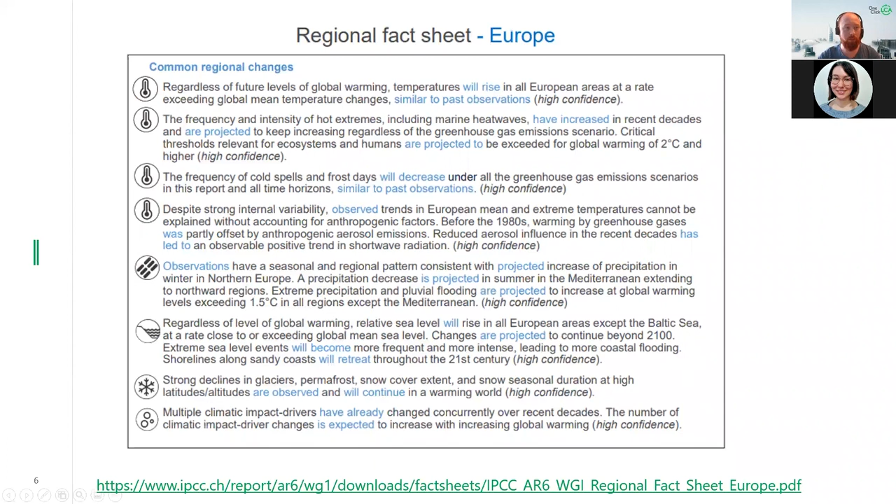So as I said earlier, 39% of global emissions are coming from the construction industry relating to buildings, 28% from operational emissions, and 11% from materials and construction. So those are the kind of target groups we are trying to reduce.

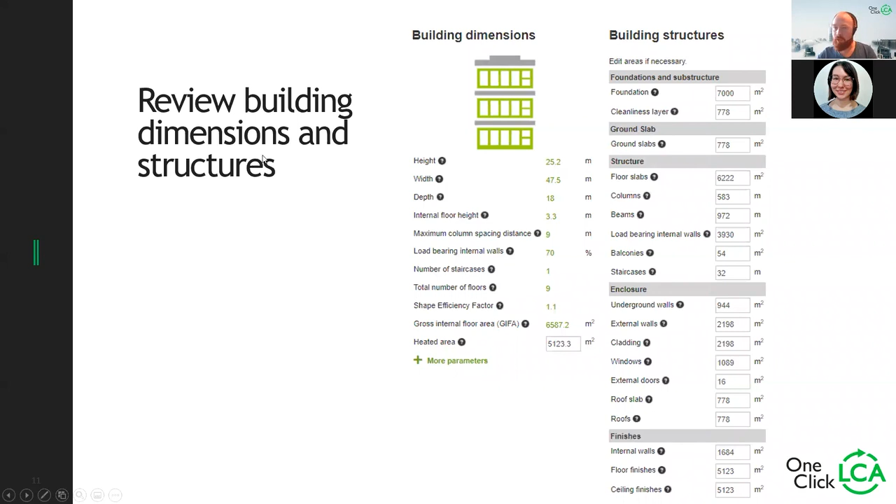If you make changes to the parameters in green, it will automatically update the building structures, but it doesn't go the other way around. So if we, for example, have the height of 25 meters, and I change the foundation to 8,000 square meters, it won't automatically update the building dimensions. So just make sure it goes one way. I'll show this in a demo - I'm just covering the theoretical part first, then I'll show how this works. If we go to the next one, and I'm sorry about my mouse, I'm just trying to navigate between the screens.

We can then also make some changes. After we have decided on our building dimensions, we get to the overview page where we already get that overview - our baseline CO2 equivalent per square meter. I can also click on the assumptions if I want to go back to what I've just done before, to see what I filled in for how big my building is or what kind of frame I have. The emissions you see right now are for the chosen design I had selected.

This was a precast concrete frame. If I wanted to, I could change it right away by going to apply scenario and taking a new option. The apply scenario feature is not available in all versions of Carbon Designer, but in most of them, for example the international one, you have it as an option.

We can then go through all of the different elements here. We can click on these elements, expand them, and see what is underneath them. If we take the example of a concrete column, I can see there is some data underneath it, but I could also click it and choose something else - change it to a steel column or perhaps wood or any other option. For most of these options, you can also change the constituents underneath them, which I'll show in a bit, by clicking the edit button.

If you click the edit button in the concrete, I could change the grade of concrete, change it to have a different percentage of recycled content, or change the reinforcement steel - these kinds of things, all the elements related to the constituents. If we then save this, it moves directly to our building materials query, so we right away have the data there with the different constructions - for example, the steel core piling, which is automatically calculated with constituents behind it, the concrete sandwich elements, etc.

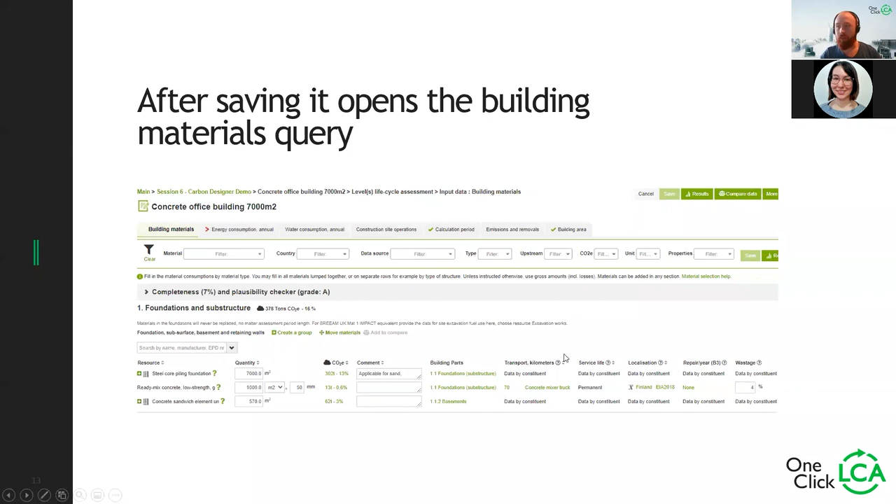If we fill in the mandatory queries, we actually also get our results. So this is what I'll show in a bit as well. So then if you have filled in your Carbon Designer, you can right away get the score in kilograms CO2 equivalent, the total number, and then also right away the circularity score just based on the materials we have included right there.

So now I'll talk you basically through how we optimize this and make sure we can make some changes here. And we'll do this in this case from an emission point of view and a circularity point of view. So I'll now switch my PowerPoint away and we'll go through these steps in the software. So I'll open my project, Session 6 Carbon Designer demo. And as you can see, we already have done some stuff here.

So let's run first once through the step of actually creating this Carbon Designer design. And then we'll do again this optimization. So for this, I'll just create a new design. So we'll just do example Carbon Designer setup. I'll just leave everything the same regarding the settings. I've set up this project to be in Finland, but you can of course set it up for wherever you are. We just click on the input data and we just go directly to the create baseline, what we just saw before.

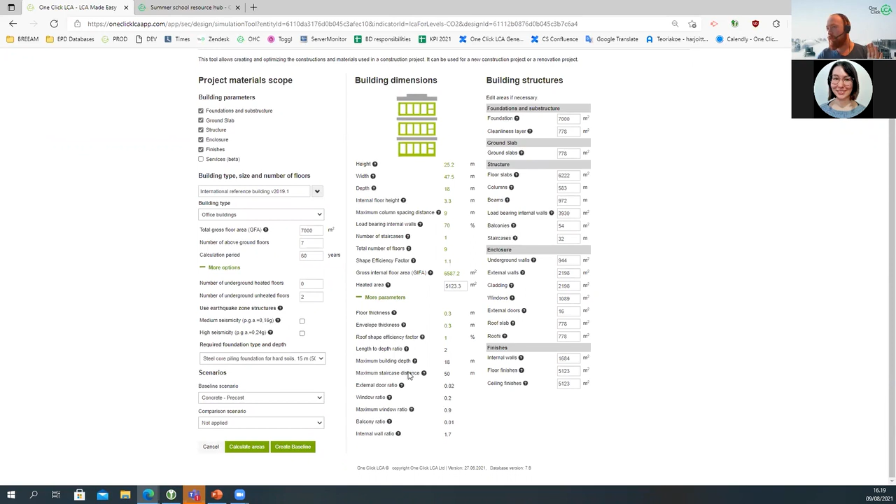We then have our building dimensions. So we have the different elements of how long everything is. You can also open the more parameters to see a bit more what is underneath them. And then based on the dimensions we have here, it automatically creates our building structures. The building structures are important because they define actually the quantities of our materials. Because if we use Carbon Designer, it makes use of our constructions. So basically these ready-made assemblies, which already have materials underneath them. So there's an assembly for the foundation, for the cleanliness layer, for the ground slabs, etc. So all that is already available there.

If this all looks okay, I'll just click on Create Baseline. And in this case, it will probably take about 10 to 15 seconds. But now it will try to make my theoretical building that I've inputted based on those settings. So now it's creating an office building in Finland, 7,000 square meters, 7 above ground floors of 1,000 square meters each, 60-year life period, 2 underground floors, and I think I'd set a 15-meter foundation depth. So I'll just have to wait until it bundles this together.

Sure, Maria. I'll try to talk a bit slower.

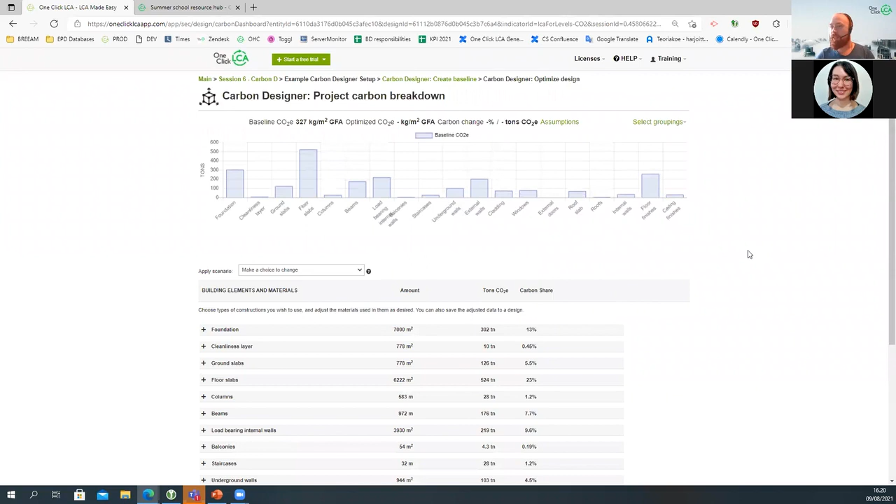So now we can see what it has created from Carbon Designer. So I'll zoom in a little bit. We can see we have gotten our emissions for our baseline CO2 equivalent. Yeah, I'll zoom in a bit more. Is this better?

We have the assumptions here. So in the assumptions, I can right away see what I have chosen already, basically what I've just discussed. So that 60-year life period, 7,000 square meters, 7 above ground floors. If I then have the initial choices, I could make a new choice. So I could, for example, load the entire building to have a wooden structure, or I could do in situ structure or steel, and it would automatically update everything.

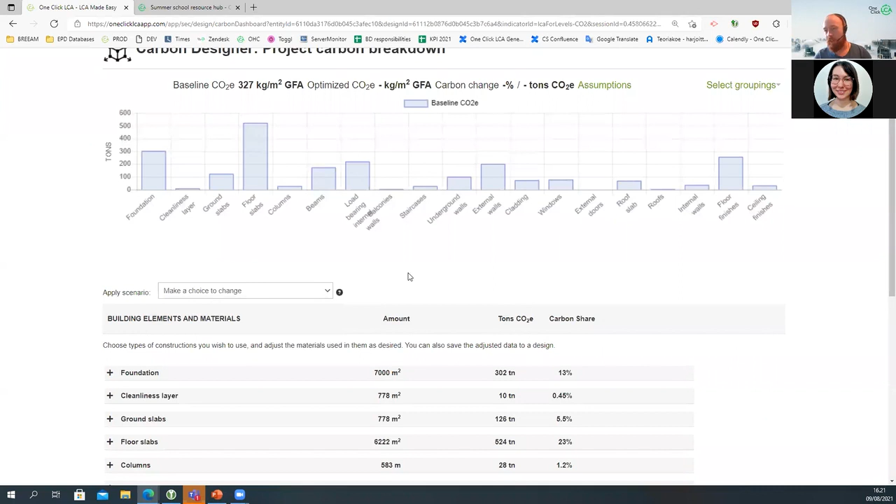But you can also do that manually. And the manual part is the part I kind of want to discuss right now. So if I have these elements, maybe we look at the ground slabs. I can see that the ground slab is a concrete ground slab assembly with some insulation.

And if I open it, I can also see the elements underneath them. So we can see that there is, for example, EPS. I could also choose different types of EPS or have different types of concrete I could choose, different types of reinforcement, etc. If I make some changes here, it will automatically update it.

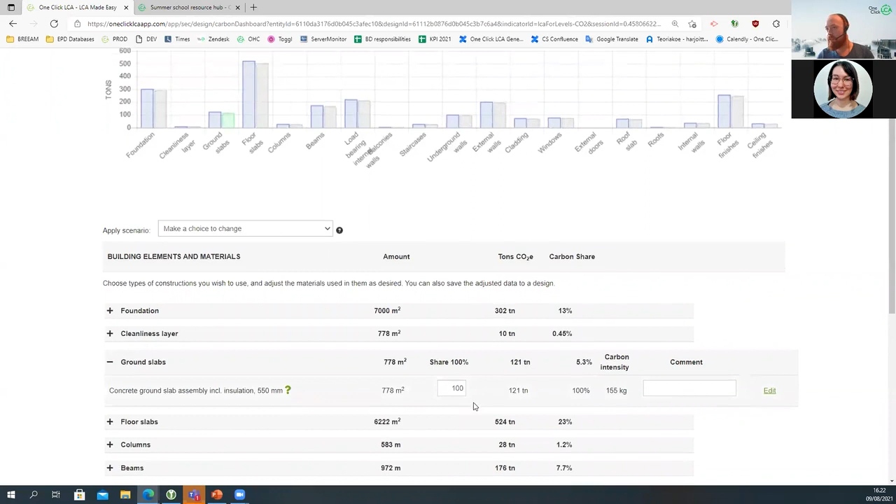So if we have here 126 tons of emissions for this specific assembly, I could say we're changing this to reinforcement steel 100% recycled, and it changed that by about 5 tons. So we can right away see also it updates, optimized 121 tons.

We can also change entire assemblies. Of course, from an optimization point of view, it's really nice. But if you're having a building and you're only changing the columns to something, it might not be structurally sound. So you have to make these kinds of changes so that they would, of course, be representative. But let's say we have our concrete columns. We can see from the concrete columns that these are made with a ready-mix concrete and with a reinforcement steel. I could also click on these to find out information about them.

But what if I change these concrete columns to steel? Like we're not doing any concrete columns now, we're replacing it completely. We change here to steel column. It will update it, making sure it has changed them. And then right away, we can see that if we're actually making this change, it's not really for the better. We're actually ending up with 4% higher emissions. But if we're changing this to a timber column, my bad, we can see that we actually reduce the amount of emissions there.

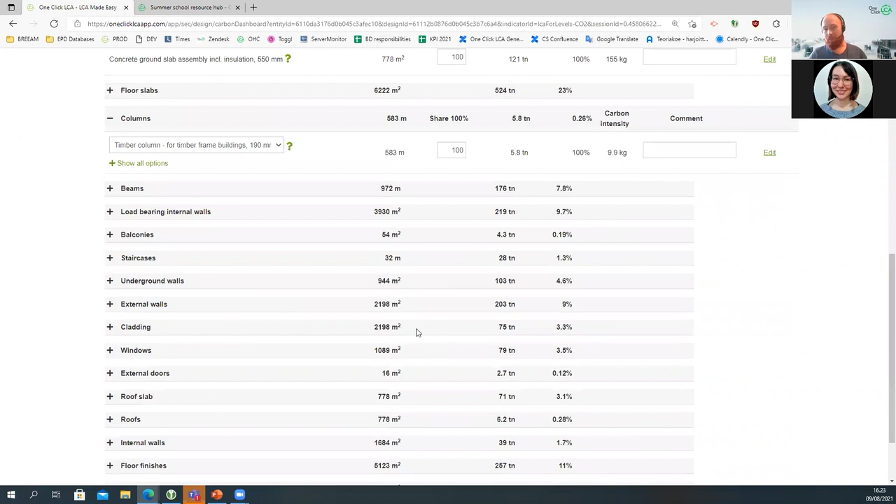So this kind of quick optimization you can really easily do in Carbon Designer. You can also do it later when you're on a building materials query, but if you want to maybe already try some different things, we can do it here as well. So for most of these elements in the building, we can do this kind of optimization.

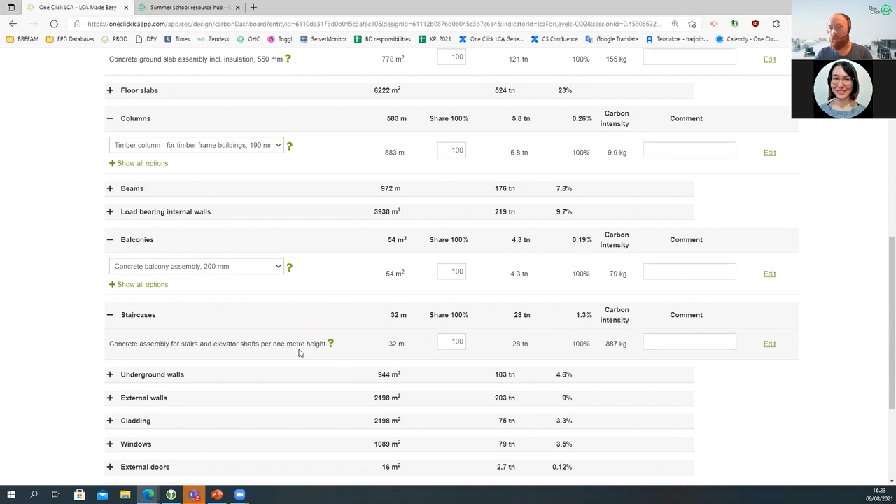Not all have these options, like balconies, we have just a couple options, but for example, staircases, there's just one option. Because usually if we're having an office building, staircases are still using a concrete elevator shaft, which while you could replace it with CLT, it's not a very common option nowadays still. So you can go through all the options to make sure that what we have chosen is relevant for the type of assembly we are doing.

Maybe I could, for example, change my roof to a green roof assembly. And I just wait until it uploads. And then I can right away see that for the roof slabs, for example, I've done some optimization now as well. So these kinds of optimizations you can always run through and find out what would work best for you.

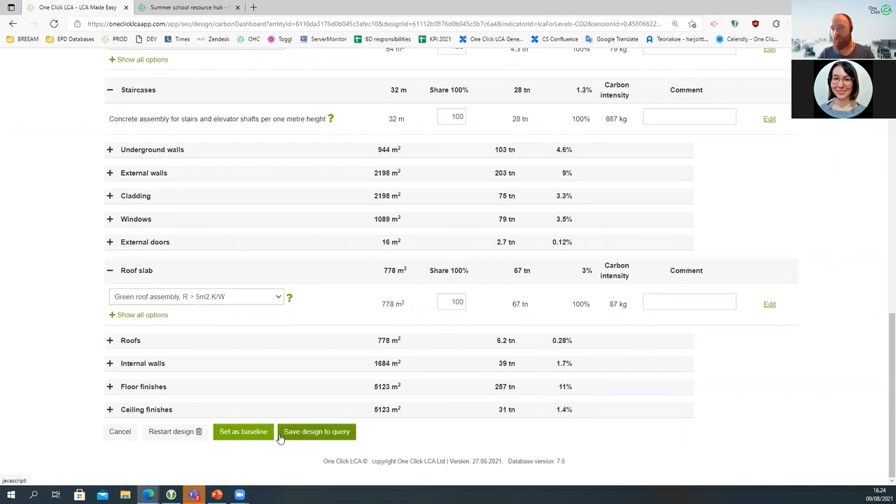If this works okay, we could say, okay, we are making this our new baseline. So these options are now going to be our base, and we're going to try to improve on that again. Or we could also save it directly to our building materials query and just see what kind of results we get right there. So if you click on save design, it moves it right away there. And in this case, it will actually move it first to the building materials query, not to the results page.

There's one question, is it possible to see the layers within a certain component assembly? Yes, and I will show it in a second once it's done loading this. Usually it takes, again, about 10 to 15 seconds, and then it will be ready for usage. So we can see, if you normally do an upload, it takes you straight to the results page. Here it will take us first to the building materials query.

And to answer Zahabia's question, can we see the layers? So the different types of constructions we have used are usually defined based on square meters. So we can easily calculate with Carbon Designer when we have very basic building parameters available. If we, for example, take the steel core piling, this specific one has been recorded per square meter. It also says so in, for example, the resource names or the description. And it then automatically has the data per square meter.

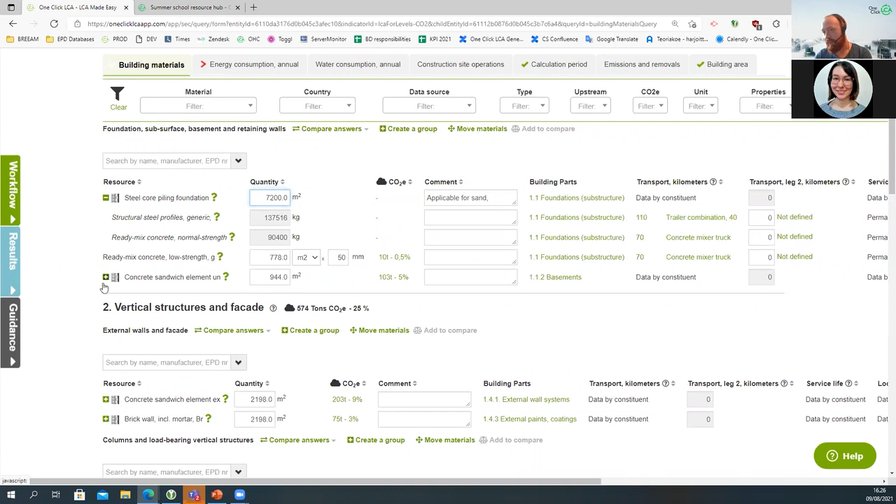So if we would want to quickly change this to, let's say, 1200 square meters, it automatically updates the constituents as well. And these types of constructions are basically how we do all the Carbon Designers. So it doesn't really matter what version you use. They usually have very custom constructions which are relevant for those specific areas.

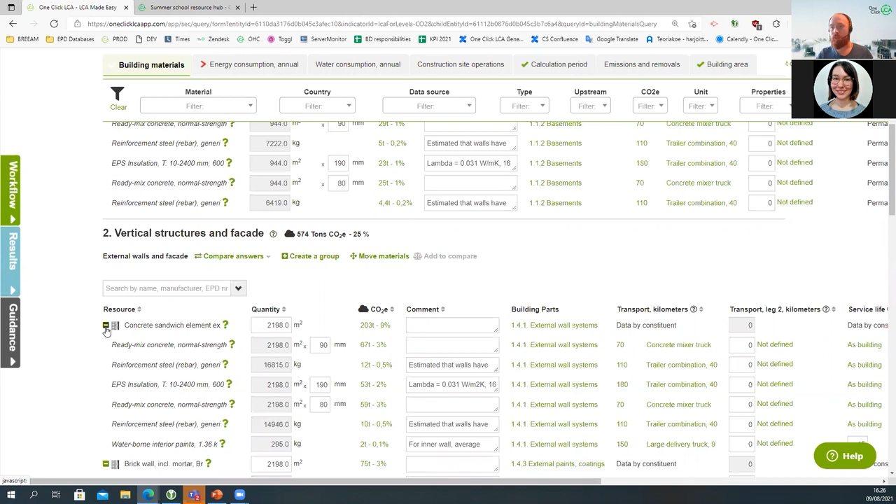If we're, for example, loading this Carbon Designer in Southern Europe or in the UK, the different types of constructions there will be different, and the different constituents will be different. The quantities of materials will be different. So they're all adjusted to what we are commonly using in those areas.

These kinds of constructions, as I said earlier in perhaps session 2 or 3, you can also find yourself by going to the material filter and actually searching for the constructions there. So there's a lot of these ready-made constructions. If you're not really sure about what kind of materials would be included, you can find them there and go through them quite easily.

So how would we do this kind of optimization? Well, we can already do it in Carbon Designer. Basically, before we actually end up on this phase, we decide, okay, we want to change the ground slabs or we want to change the external walls. We could already make the change there. But if that point maybe wasn't the best point and we want to change it later, we can still do it here.

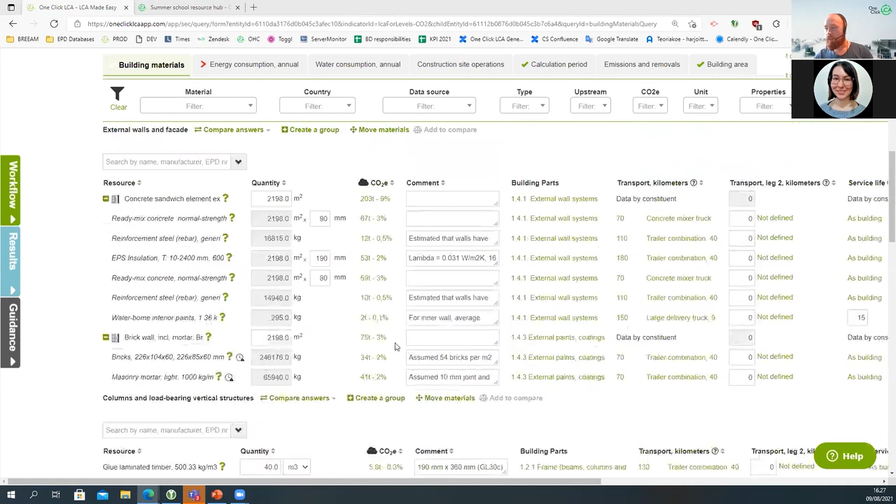So I will go back to the main page. I'll just quickly enter an energy consumption, so we actually also have the figure for this design. And then we can talk about how we can actually optimize the design from an emission point of view to reduce emissions, but also from a circularity point of view.

So I won't actually enter a quantity of energy. I'll just give a base value or a 0, so it actually loads the number. And once this is loaded, I'll take us back to the main page for a sec. Okay, it has loaded that.

So if I now go back to the main page, my example setup has been kind of mixed with what I have there. But as you can see, I'd already made 2 before as well. So the first design which I had made was the office building, where I did the precast concrete frame. I have already done one iteration, which is a wooden frame. So completely timber, as we can see, much lower in emissions. And now I just made some changes in this example design.

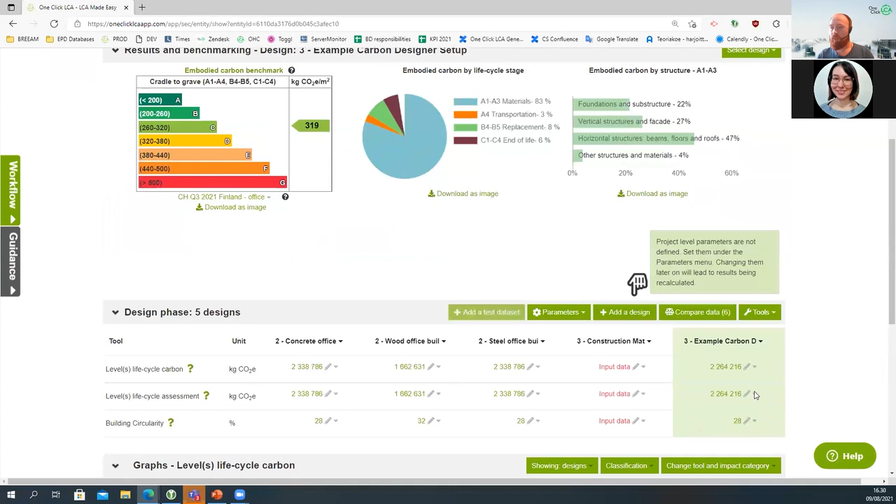So we have now the steel office, which is the same. If I then go into here and I go to optimize design, I'm only optimizing this specific option. So now it will open my copied concrete design where I can make some changes, apply some different settings, and then I could quite easily already do a comparison as well. Just waiting until it's done.

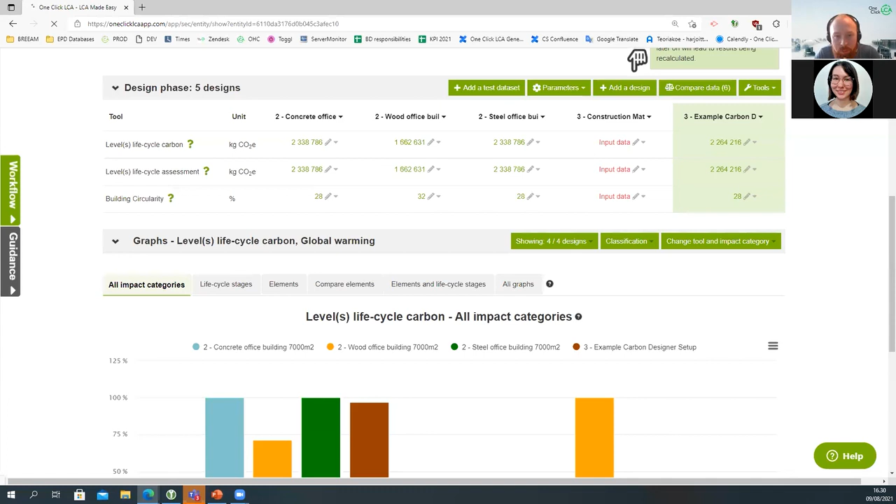Maybe I can answer one question in the meanwhile. Harry Fry asks: if we do a more detailed design after Carbon Designer, is Carbon Designer updated with the new volumes and materials? If you add materials after you have done it, it will not update those automatically. Carbon Designer really works with these presets with existing constructions. If we change those existing constructions, it will change them automatically. But if you add any new data, it will be kind of like an extra or optimized assignment. It doesn't stay within the same design.

So I have now still the same baseline CO2 equivalent as I had in the beginning. No changes because, of course, I haven't made any changes. So if I would now apply a steel frame, it will warn me right away. If I make this change, it will change all the materials I have here. So if I had manually added some new data here, that would be overwritten. So very important to take note of that. I'll just let it override because I don't need to keep this copy design the way it is, because I already have the original one, which was concrete.

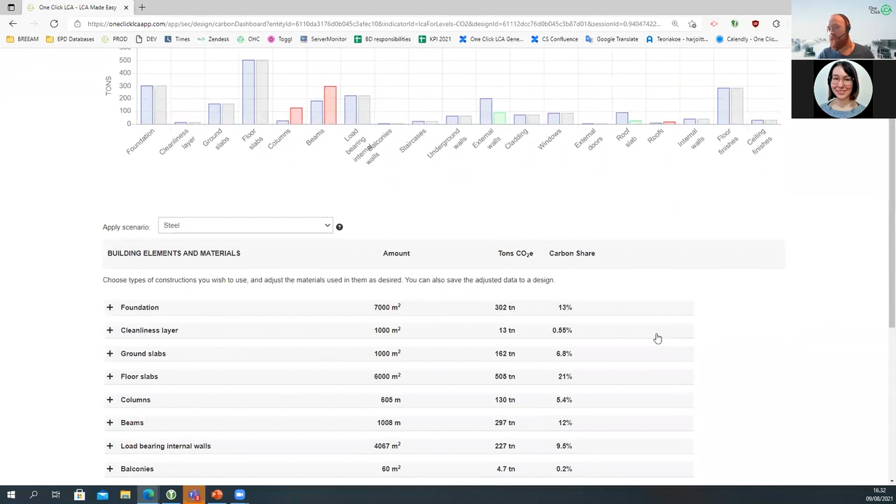I can now see that from the changes I have made, we have changed it from a precast concrete to a steel structure. All the emissions we have will now be relevant for a building which is steel. So we can see we have some hollow core floor slabs. We still have concrete ground slabs, but if we check the columns, these are now steel, and the beams, for example, are also steel. So all the structural elements of this entire building are now steel based.

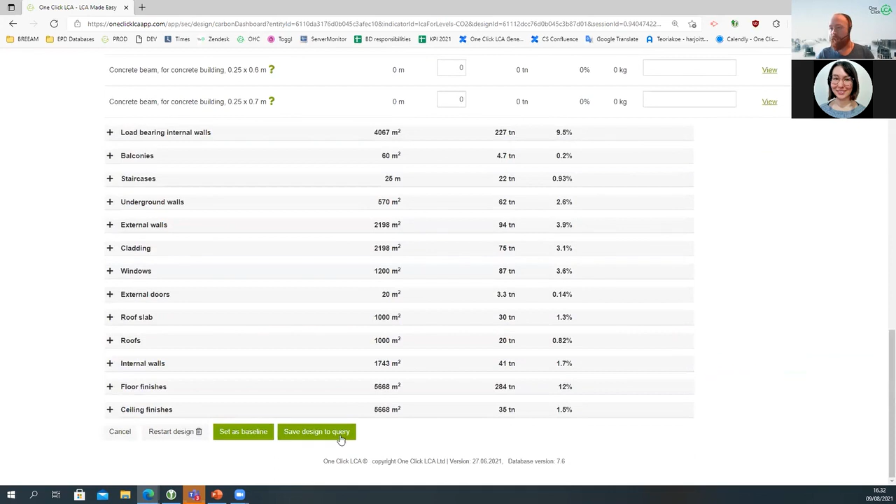On the overall, comparing them with each other, we can see that it doesn't have so much effect on the foundation or the ground slabs, because in this case they would be concrete. But for the columns, the change is quite significant. For the beams, the change is also quite significant. So we need much more steel to have this building be structurally sound. But if we take a look at the external walls, we actually reduce the emissions there. And we can also see that the roof slabs are also lower. So if I would just save this directly to the building material query,

there's a comment from Palab that the constructions shown may not be that practical right now because the real life choices are made on discussion with structural engineers. Of course, that is true. But Carbon Designer is intended as an early phase baseline tool. So when you just know what size building you're going to be building, you might know the floors and whatnot. You could already get an idea of what the emissions would be.

If you're in much later phases of design, maybe already in the concept design or detailed design, you're probably not looking at Carbon Designer anymore. But before that, if you don't have so much data, you might not have a BIM model, you might not have cost plans and whatnot. For that part, it's a great tool.

So I will go back to the main page, and now we can actually see right away also how we can compare these with each other. We have now our concrete office with a certain value, 2.3 million CO2 equivalent, give or take. Our wooden office, kind of lower, 1.6 million, a little bit higher also from circularity point of view. And then we have our steel office. So these designs I've created all have a different type of material setup, but they're all representative for an office building of the same size.

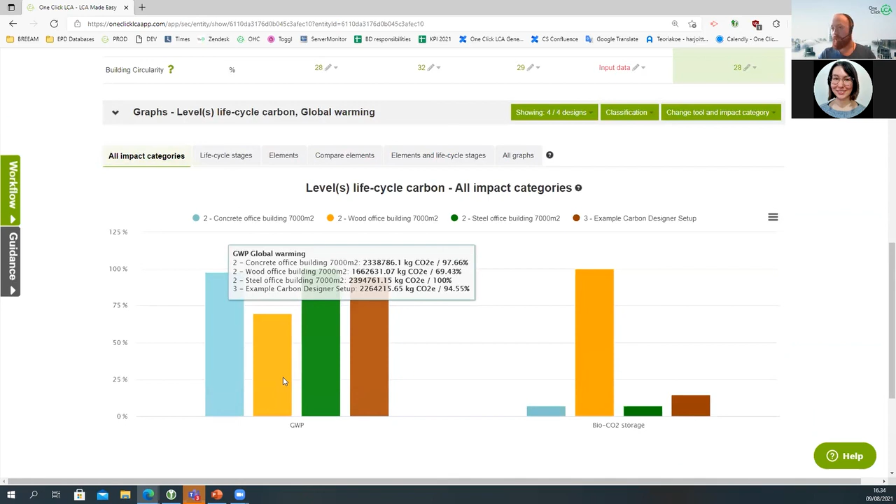If I would also compare the designs underneath here, I could, for example, see right away that global warming potential wise, the wooden building would be much better. If I would check the different life cycle stages, I also just have lower A1 to A3 material emissions. So it's quite good. But if we take a look at the other emissions, for example, the replacements, kind of the same. There's a bit lower replacements if we do a steel building versus the rest. We still have kind of equivalent end of life emissions. And of course, we have some construction emissions, which are kind of the same, and transportation also not that much different.

If you want to change, also looking at different types of indicators, we can do that as well. So right now we're looking at the global warming potential, but if I perhaps want to approach this from a biogenic point of view, so what is much better to use, we can see, of course, that the wooden building has much more organic materials. So technically, we could have much more benefits from there at the end of life as well. But we can also look at any of these other indicators.

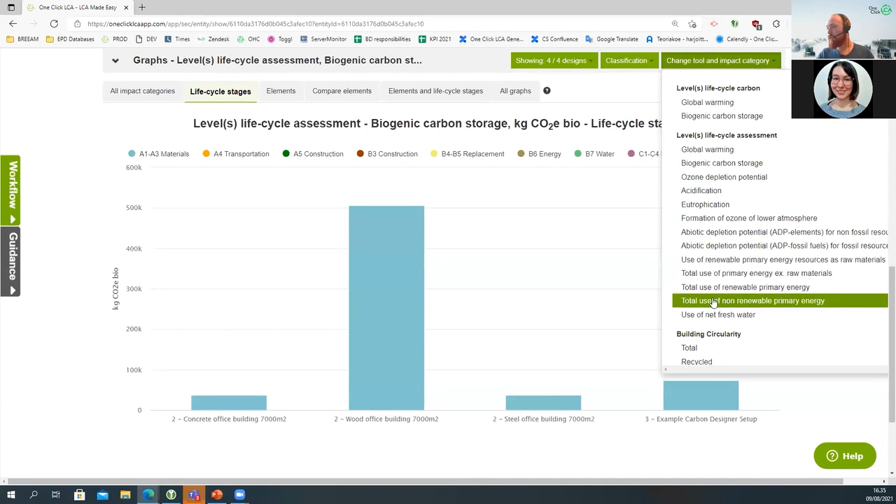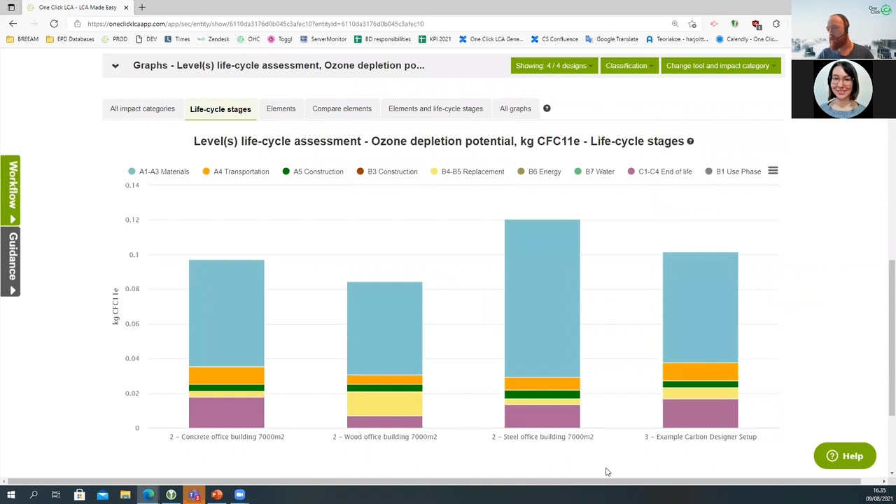So we could do ozone depletion potential. And from an ozone depletion potential, we can see that the steel building is most intensive and the wooden building would be lowest. But if I want to do this from a circularity point of view, I just want to get the total circularity scores, I can do that as well. So we can now see the different materials here, what the circularity score is.

So if we're doing this kind of optimization from an environmental point of view, we can see that if we lower the emissions by quite a lot, in this case, almost 700,000, it doesn't necessarily have to change the circularity point of view right away either. So we can see our concrete building, where we had a 28% circularity score, but 2.3 million emissions.

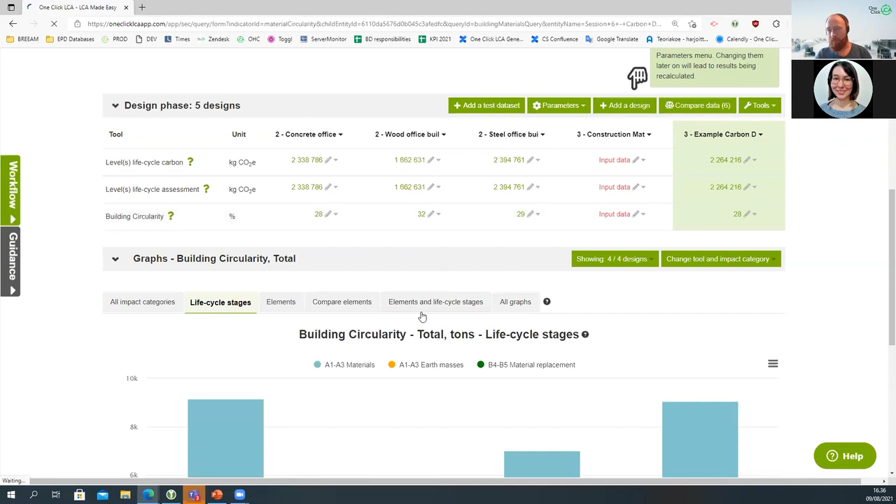If we do an office building, wooden office building, the circularity score isn't necessarily that higher. And that, of course, has a lot to do with what kind of materials we are sourcing for the project. Maybe let's take a look first at the concrete office. So I'll open my settings there. I have all those different constituents, so we can see why the score is the way it is.

If we're opening this one, we can see that, for example, for the steel core piling, we have used, in this case, steel profiles, which consist of 60% recycled content. That, of course, directly translates to our circularity point of view that there's 60% recycled steel there. If we're looking at the concrete, we have used an option with only 10% recycled binders. But recycled binders in concrete are not equivalent to the amount of, for example, cement there weight-wise. So 10% recycled binders in concrete means only 1% recycled volume of our materials.

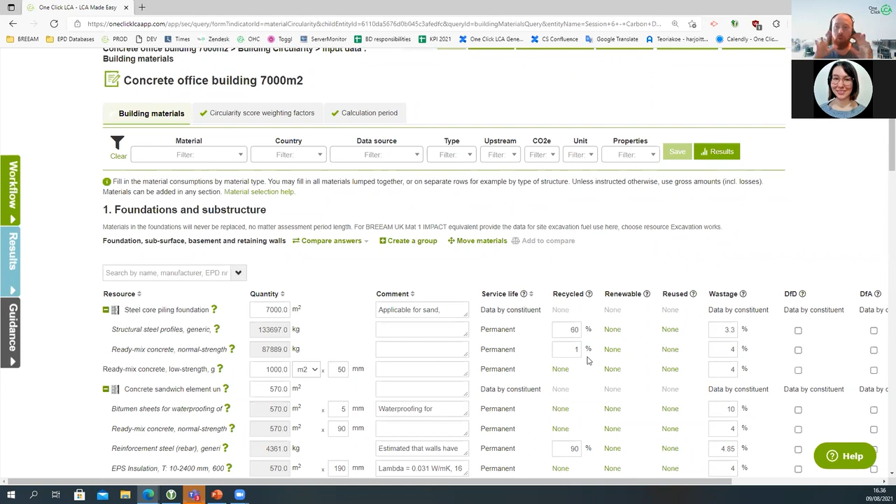And when we talk about circularity, we of course look at all the materials in our building, not just some parts. When we also look at the different elements here, we can see that some of these might not have any recycled or renewable content. So they are virgin materials, which have been newly made, which of course from a circularity point of view isn't great. We can still improve that by having materials which are lower in emissions. But if these are lower in emissions, but they're still virgin materials, it won't improve our circularity score as well. But if we can perhaps recycle them, that could of course have quite an effect.

So we see that we have some materials here which are landfilled, which is not great, but it seems that we might actually be able to recycle the bitumen or these kind of things. So all the changes we have here are directly affecting the circularity score. If we go to the result page for our concrete office building, let's see what kind of things we have. So we have here the 7,000 square meter office building, very high percent of virgin materials. And that is probably because most of our materials here, the concrete, is virgin. We have quite a low percent of renewable or recycled. So the values we have there are just the ones which are coming from EPDs, when a manufacturer tells us, okay, we have used X amount of materials which were renewed.

When we take a look at the returned materials, so what happens with our materials after the building is deconstructed, there's not that much being disposed of. So that's kind of okay. Probably materials which are inert, which we cannot really recycle, like perhaps insulations. We have only some which are recycled, but I haven't marked anything as reused. So that is of course something I could do myself, and I'll show you in a bit in our wooden design. We have a lot of concrete which is downcycled. Of course, if we build a concrete building, the majority of materials are going to be concrete. So concrete we can downcycle to aggregates. So there are some benefits to it. We can reuse it again, but it won't really be the same function anymore.

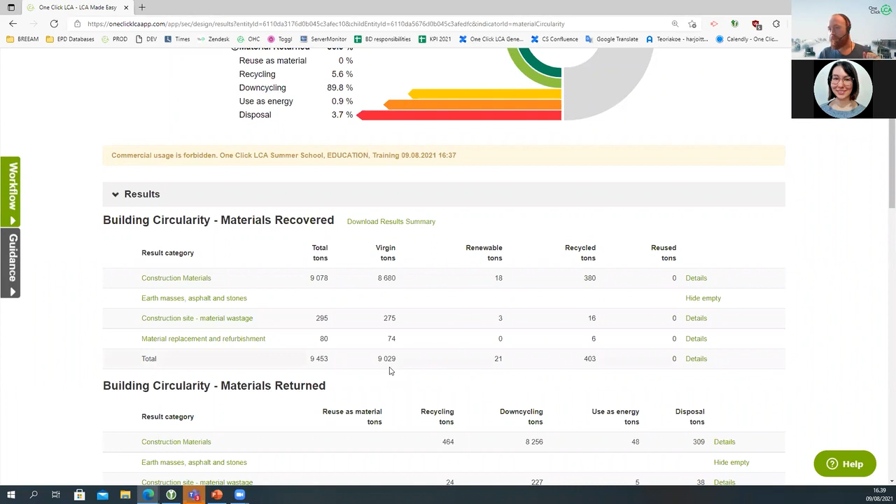If we take a look at the materials returned, what happens with these materials? Most of our concrete is downcycled. And if we're then taking a look at our key material groups, so the biggest groups which have an effect on circularity, most of these materials are concrete, almost 8,000 tons of it, and 99% of it is virgin. So of course, if we're actually building this, we probably don't want to build with as much virgin concrete. And since the virgin concrete is kind of heavy in emissions, but it can be downcycled, we do have 50% materials returned, but that only leads to a circularity percentage of about 25%. Metals, however, can often be recycled really well.

So the circularity point of view is quite high there. Bricks, technically, you could reuse reclaimed bricks because bricks can last pretty much indefinitely, but in this example, I haven't marked these as to be reused. Gypsum base will usually be landfilled. Insulation, depending on the type, but likely in these examples it's landfilled. Glass will be recycled, but not to the same level as before. And then, of course, we have organic materials, which are by definition renewable, so the circularity point of view is quite high there.

There are some other examples you can see here also, if we have used, for example, design for disassembly and adaptability, but I haven't covered those specifically here.

So this is now the concrete design, at 28%, not too great. So if we are doing a wooden building, we probably should be able to improve on that, I would think.

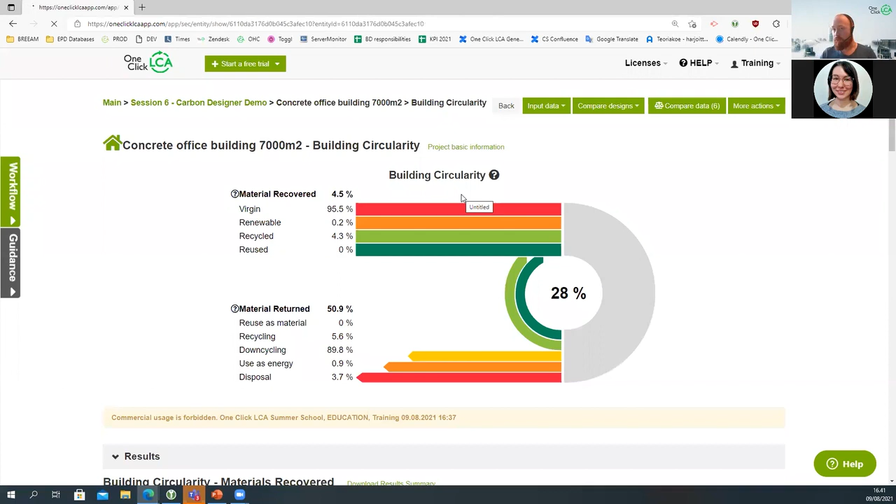So if we have then here our wooden office building, we can already see from an environmental point of view, it's quite a lot lower in emissions. So if I want to actually view the results of this one, we're just looking at the emissions right now, and compare it with my other one.

So I will compare the designs. I'll compare it to my concrete building. I can see emission-wise, just global warming potential, it's already 37% lower. So that is quite good.

The transport is also a lot lower. This is probably likely related to the fact that we just have less mass to transport, because I actually haven't changed the transportation distances here.

There's a little bit more A5 emissions. So we might have to have a bit more material waste, because wood has to be cut in pieces, which you obviously don't have if you do precast concrete, because it's already in nice ready-made assemblies.

We have some more replacements. So organic materials might not last as long as precast concrete in this case, even though nowadays it can also last quite long with the right treatment.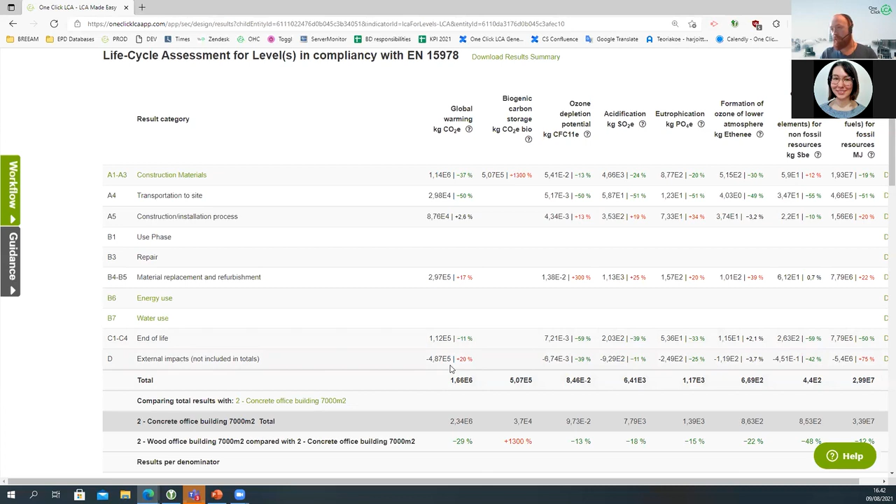We have a bit lower end-of-life emissions, probably because we have less emissions for the treatment. And then we have more benefits in the D phase, because organic materials can be incinerated, which of course leads to reclaimed energy. So, in most of the other categories we actually have improvements, lower acidification, lower ozone depletion potential, and of course more biogenic carbon storage because we just have more organic materials.

So if we then take a look at our wooden design, but we look at this from a circularity point of view, we could probably see right away already why the score is a bit higher, but we could probably try to improve it as well.

So I'm opening my building materials query there, and we can see that the first parts are exactly the same between my other buildings. So I haven't really made any changes to the steel core piling or sandwich elements or these kind of things.

But what if I use better concrete? Let's say we are using concrete which is actually 30% recycled binders. I can, of course, change these resources, but for this example I will just change the percentage of recycled content, because here we don't look at emissions, we look from a circularity point of view.

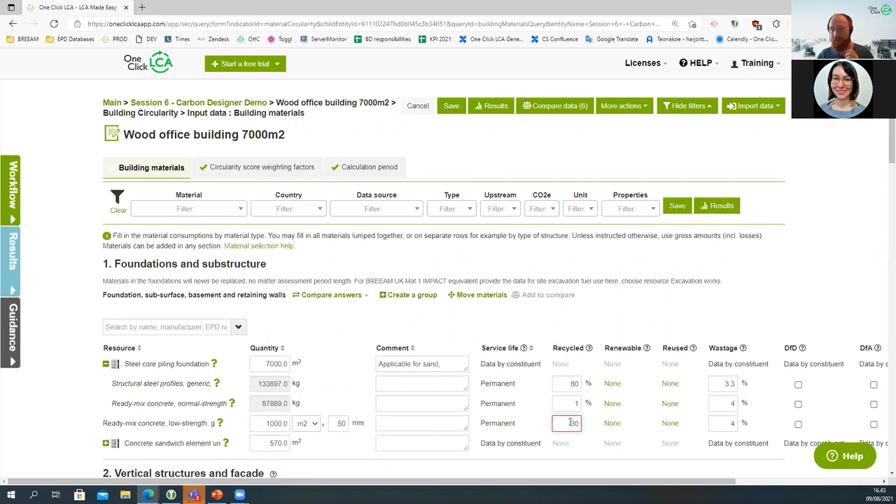30% recycled binders in theory does not dictate 30% recycled content. It would probably be, let's say, more like 4 or 5. But for just this purpose, I will just show this.

If we are having other types of elements specific to this type of construction, which is timber or wood, I could open these ones, and I can see that from the materials we have chosen here, we have quite a high percentage of renewables. So of course, any type of timber or wood or organic materials, they usually have quite high renewable content.

So we can see it's completely renewable. We have some gypsum, which has some type of recycled content. We have some insulation panels with some type of recycled content. So these are not going to affect it too much, but these will affect the circularity score quite a lot.

But what are we going to be doing with these elements afterwards? So if I scroll to the right and look at the end of life processes, we can see that, for example, the wood is currently marked to be incinerated, so then we have some benefits from it.

We have here some, what was this, plastic vapor control layer and glass wool, and these are landfilled and incinerated. But these kind of changes can affect, of course, also the circularity quite a lot.

If we make changes to ensure that materials can be reused, from a circularity point of view it's much better. So perhaps if I look at my foundation, I could build this office building on top of an existing foundation, so the elements here are completely reused. That will change the circularity score quite a lot, so maybe I set this all to zero, because let's say this was all existing.

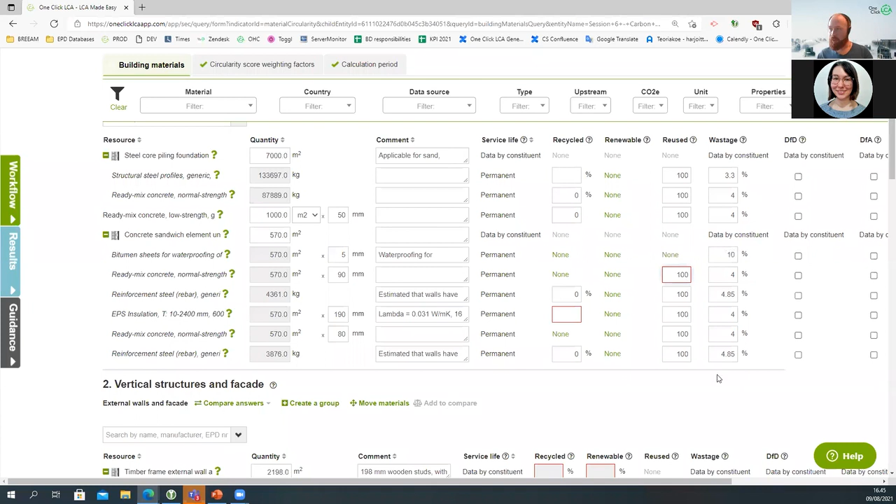I'm just marking them all to be reused. I won't change the bitumen sheets because probably they won't be able to be reused. But with these changes, we're now assuming we have an office building with a timber frame, which is already better from a circularity point of view, since we're reusing the foundation parts. So I'm just waiting until it saves.

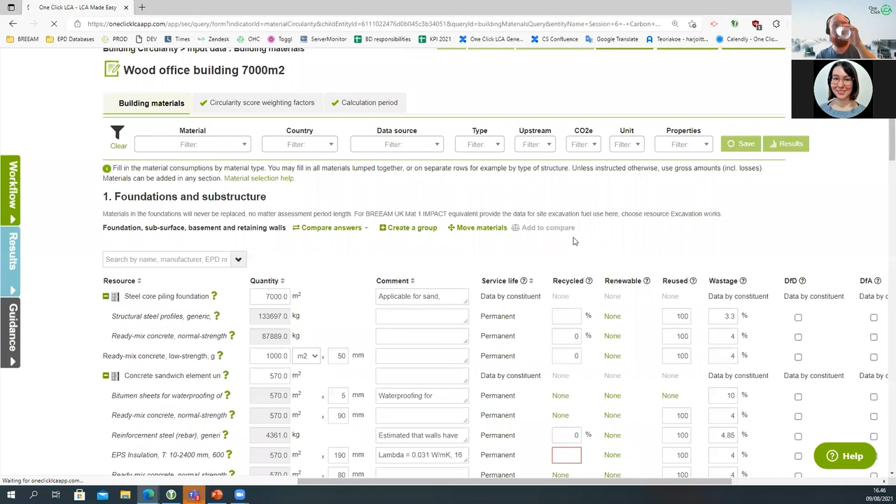So we can see, because of the changes I've made, the circularity score actually increased by 6%. That's great. When I go back to the main page to see the overview, that means the circularity of that design should now be 38%, so it's already quite a lot better.

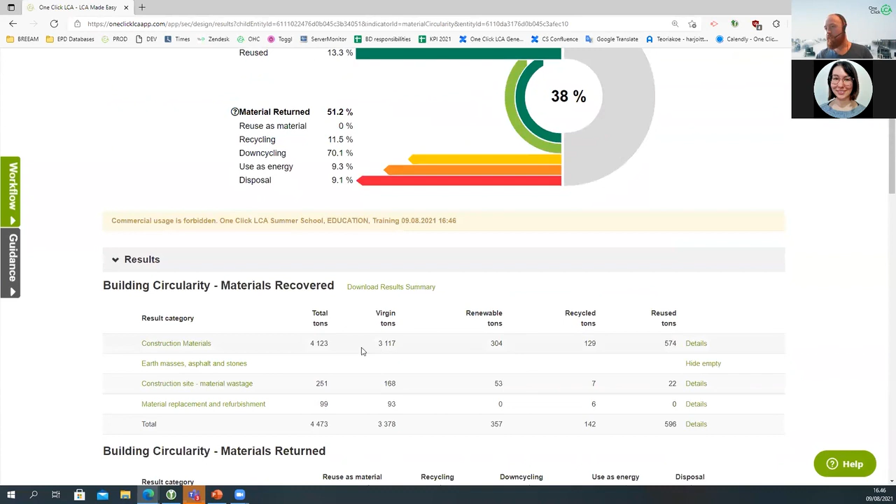If I navigate to the result page and look at this from a circularity point of view, we can see that where the first one with the concrete frame had about 9,000 tons of material emissions, we now have a lot less material. There's still a good number of virgin materials, but we now have 13.3% of materials which are actually reused. That's because I assumed we're building on an existing frame, so that right away boosts the circularity point of view, since that 13.3% is added in total to this one. The virgin percentage is still not counted.

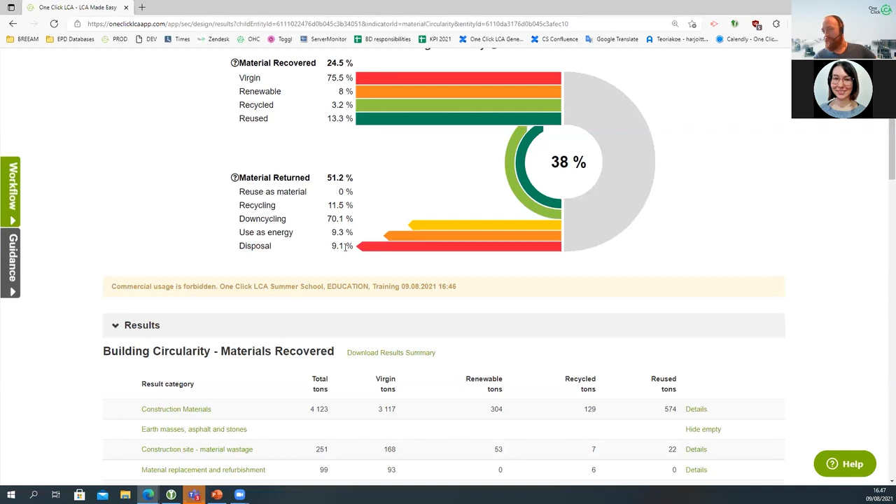When we look at the other parts, we still have nothing that will really be reused afterward, but quite a lot is reused as energy, and unfortunately a bit more is disposed. It's possible we have more insulation in this case which we can't really reuse. But just by changing those two things — including materials that might have been reused beforehand, and using more renewable materials like organic-based wood and plant fibers — we've already increased the circularity score to 38%.

Looking at our key material groups, there's still quite a lot of concrete which is virgin, but some materials were recovered, so the percentage isn't as high, and the circularity score for concrete has gone up from 25 to 33%.

We still have metals which are quite reused, and we also have organic materials, but just a larger quantity — 308 tons versus around 50-ish in the previous one. So because we've used more organic materials and reused part of the concrete base of the frame, the circularity score is right away quite a lot higher.

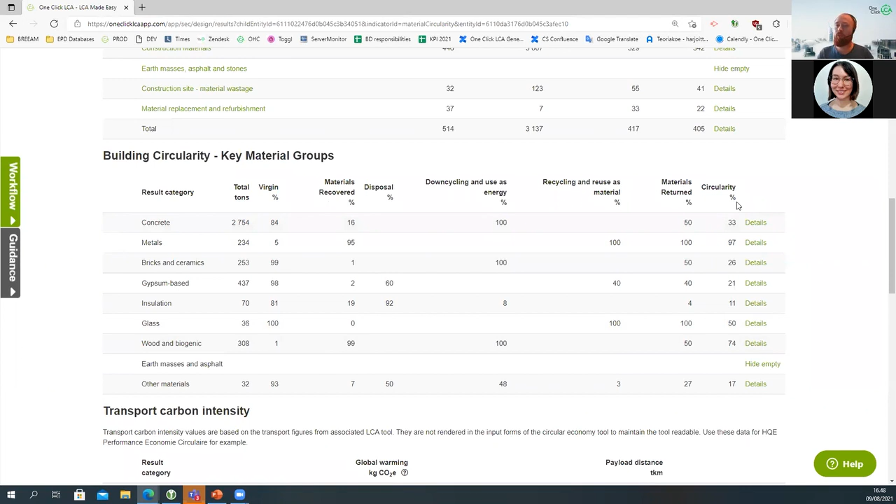These kinds of optimizations you can do quite easily with Carbon Designer, but you can also do it completely manually — if you want to make these changes yourself by adjusting the constructions to figure out what you want, that's definitely also possible.

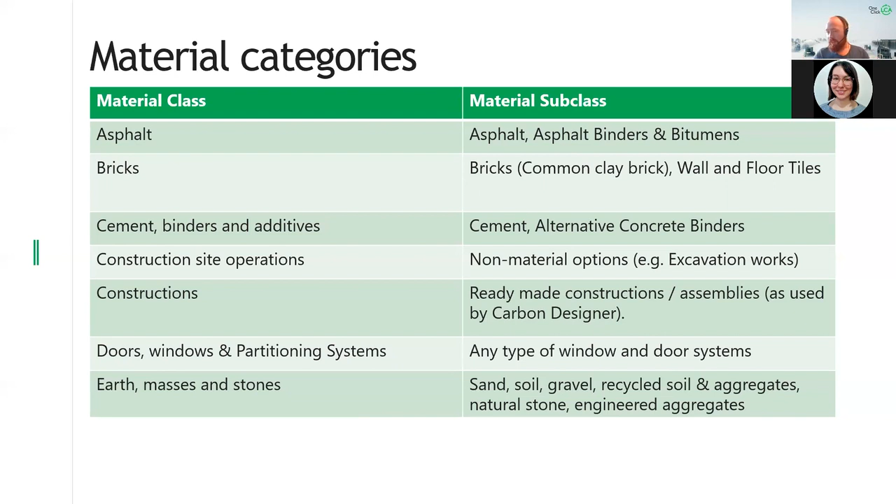We then have earth masses and stones, which is the category where basically all the natural materials are. So you'd have sand, soil, gravel, any type of recycled soil and aggregate, natural stone, and recently we also added a category for engineered aggregates - anything regarding that you find there.

We then have flooring, which can be quite tricky because there are many different types. If you're comparing a specific type, let's say two types of carpets, you really should only be comparing them against each other within that category. But we can also compare different types of flooring - a building with linoleum flooring versus carpet versus laminate versus marble flooring. Anything is possible, but everything regarding flooring and finishes you can usually find there.

We then have the different types of glass.

And glass is, of course, very important because there aren't a lot of buildings which don't have glass. And these are gathered between our regular glass, so really the basic glass panes, safety glass, which is usually stronger, coated glass, which can have, for example, sun protection or similar. And then if there's any data related to glass facade and glazing, we'll also be having a separate category.

Then we have our gypsum and plaster. And gypsum and plaster is basically anything that goes between internal or external wall, for example. We have gypsum boards, but there can also be gypsum plaster, leveling screeds for floors, mortar for bricks, tile adhesives, or different types of concrete admixtures.

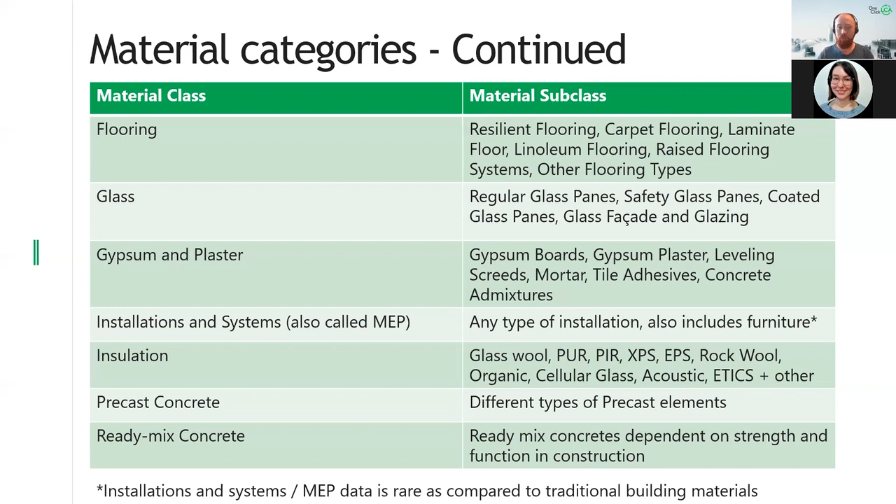Then we have three more categories which are relevant, and that is, of course, our steel and metals. So there are a lot of different types of steels, and we have gathered them based on their function or what they are most used for. So we have there the stainless steel, we have structural steel, two of the biggest groups of emissions there. And then we, of course, have the reinforcement steel. We cannot have a concrete building without reinforcements, so very important. And then there's a couple of other types of steel, like coated steel or sandwich panels, specific steel ceiling systems. They all belong to that one.

Then there is one category specifically for systems and assemblies. So kind of similar to our constructions, but then more from an EPD point of view. So EPDs for systems which are already ready-made. So a manufacturer might have a thermal system ready or sandwich panels, which basically consist of more than one material, but they are covered by one EPD. So in that case, you could have an EPD for 1 square meter of sandwich panel, which already includes the steel, the insulation, any other type of materials which basically go there.

We then have a category for wood or timber, or however you want to talk about it. And it has all the different types of wood. So we have the plain wood and timber, so your normal soft and hardwood. We have CLT elements, glulam, LVL, treated or coated wood, plywood, fiberboard, particle board, oriented strand board, and if there's any specific type of insulated wood elements, you can find them there also.

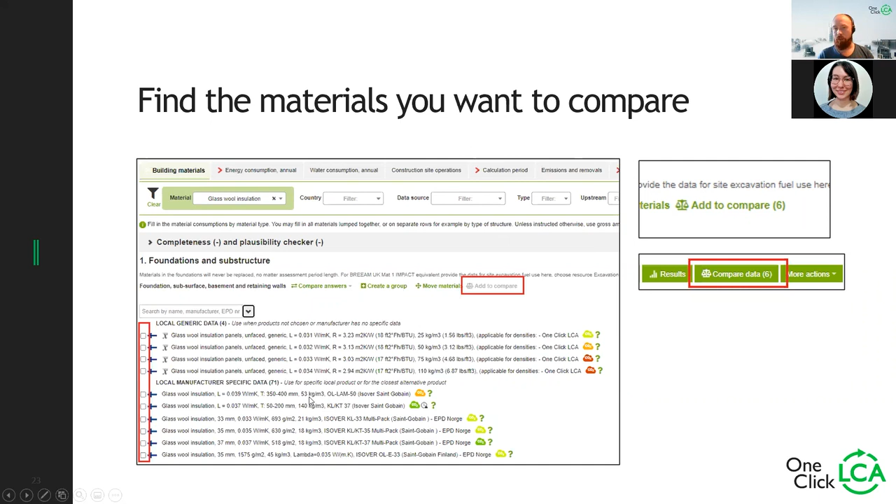And the Compare Data function will be right about here in the top right corner if you're doing this type of analysis. It will then right away show you an overview of the life cycle impacts. We can also see the cost and carbon data, and we can see the full data. So for this example, I had selected 6 glass wools. I think these were mostly from Finland, but there might be one from Norway.

So we could see right away that between the different ones, the glass wool we had here from Isover was actually quite a lot lower than the rest. From this, we could already maybe decide, okay, we don't want to go with certain types of glass wools we had picked here earlier. So this is quite a useful feature. It's available for pretty much all the materials you have.

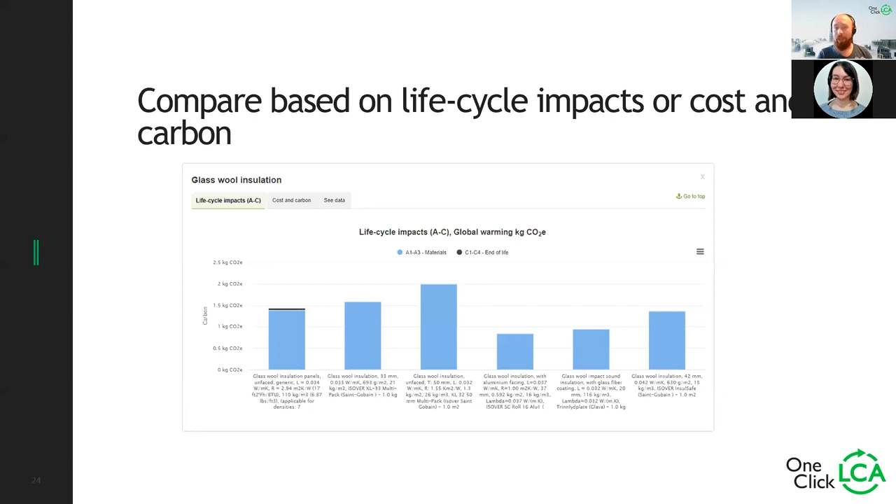Just if you do this type of comparison for the installations and systems, there it might be a bit more tricky because those materials are not as comparable as, for example, different types of insulation or steels or anything like this. We also have the green materials benchmark feature. And again, if you're on the help center, just type the green materials benchmark.

And this allows you to actually access the entire data set for one specific material subtype. In this case, we could say we have the glass wool, which I had there. The glass wool then will have, let's say, 1,000 data sets. And of course, we have some good performing glass wools and we have some bad performing glass wools. We can access this specific data set in a couple different ways.

If we are searching for the material names, we can already see the little carbon cloud symbols, which I'll show you in a sec. We can also use our CO2 equivalent filter, which allows you to narrow to different quintiles of this benchmark group. And we can actually access the green materials benchmark in the data card itself.

So we can see it there as well. Theo asked, be careful for the functional unit unless it's accounted for in the comparison tool. It is indeed accounted for already. So data usually is recorded according to certain functional units. But if we, for example, have the group for glass wool, the comparison is done on, for example, a cubic meter, even though they might be recorded with different densities and whatnot.

So if we're searching for this glass wool and we see those little carbon clouds there, we can already see where they are in the quintile of that performance group. If we have these 4 generic glass wools, we can see that one of them is in the top 40%, one of them is in the top 60%, and then we have a couple which are in the 80%. So the darker the cloud, the worse performance-wise it is compared to other data in that specific benchmark group.

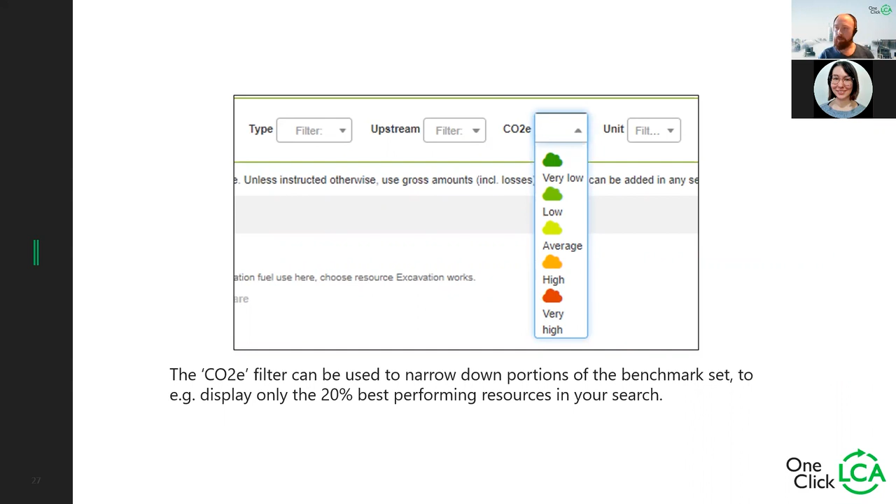If we open any type of resource on the building materials query, like I have opened a generic glass wool here, I can also see always under the environmental profile the performance ranking. So for this benchmark, I can see that in the performance ranking for glass wool, we have 983 resources. So these are all generics or EPDs which we can use. This one is number 454. So there are actually 453 which are better performing than this resource.

This type of benchmark group is available for pretty much all, but as I said, with the MEP or the installations and systems, there it can be a bit tricky because there you have a lot of variety in different types of resources you're comparing with each other.

The glass wool benchmark example which I had, let's elaborate on it a bit more. So if I open the glass wool group, I saw earlier already in my previous slide that there are 983 which are eligible for benchmarking. In the benchmark group itself, there's actually a bit more, 1,014. But there are some resources which are, for example, so high in emissions that you cannot really compare them with each other. So we leave those out of the benchmark group.

What I could do right away here is perhaps eliminate quintiles right away. The resource I had selected is at 28.17 kilograms of CO2 equivalent per cubic meter. It is not in the lowest benchmark group, but it's definitely also not in the highest. So there's a lot which is performing much worse. If I unselect the very high and the high, it eliminates right away 40% of those, which basically gives me whatever I have left underneath here.

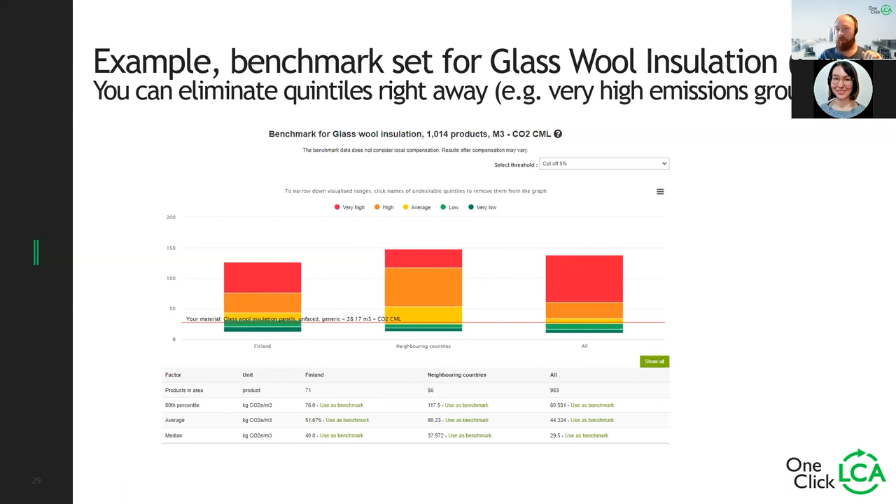So if I'm looking for a good glass wool in Finland, I could say, okay, in Finland, we have 71 products which could meet my criteria. If I want to go a bit better, I could say I'll take 40 kilograms of CO2 equivalent per cubic meter as my benchmark. I only want to see data which is underneath that. If I click that one, it will tell me, first of all, that there are still a lot of resources behind my benchmark. So 665 possible resources from all around the world.

I can see that behind my benchmark in Finland, there's only 36 which could meet my requirements at this point. If I'm looking at neighboring countries, so for Finland, this could be, for example, Norway, Sweden, Russia, we have 29 still below the benchmark. If I look worldwide, we can see that there's quite a lot of options. But if I'm building locally, I probably don't want to get my insulation from Canada or Spain or whatnot. So let's try to just go for good products. I want to do something really sustainable, so I'll select 50% under my benchmark.

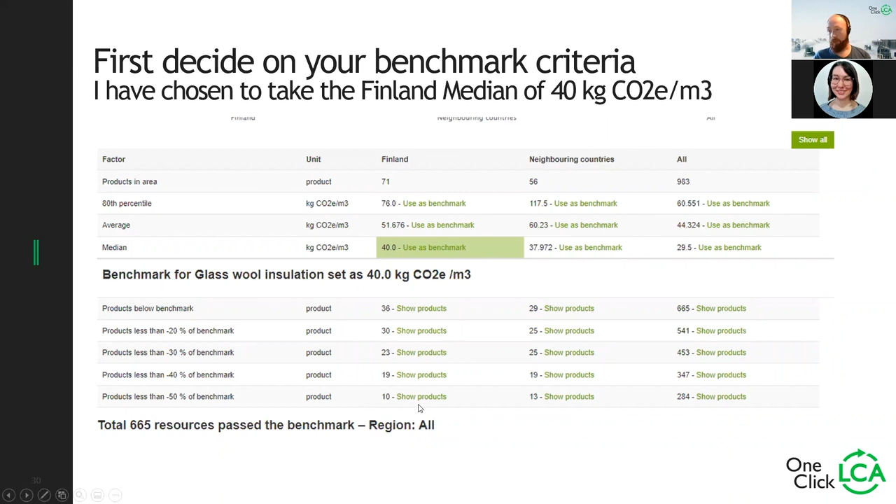So then we have quite good performance. Then we just get left with 10. And in this case, I could see that there is a specific glass wool from Isover, a specific standard 42 roll, probably some product name. This would be my best bet. So if I would want to go for the absolute best performing environmentally, I could go for this one.

So even though this specific glass wool might have been recorded in a different thickness from others, because we calculated to one common functional unit, in this case cubic meters, we can still compare it quite well with each other. And of course, the functional unit we have here is not the same in all material groups. In some it might be kilograms, some it might be tons. So it depends on the material we're looking for. But yeah, it's quite an easy way to find it this way.

I'll go over that in a bit in the software itself, but let's quickly also talk about the results, and then I'll cover that in the software itself. When we are looking at the results of anything we're trying to do, we can basically get it in two places. We can get it from our main page when we have done some quick analysis and we just want to get the totals, or we want to compare some type of graphs, or we can get it from the result page if we really want to dive a bit deeper into what we are doing or analyze which building elements are causing most emissions, which materials are the heaviest, and these kind of things.

So the main page is always the quick way. You just get the overview, you get the total, you get some nice comparisons, or we do it a bit more advanced way on the result page. When we're on the main page, and this is if you just open the project itself, it will always start on the top with the results and benchmarking.

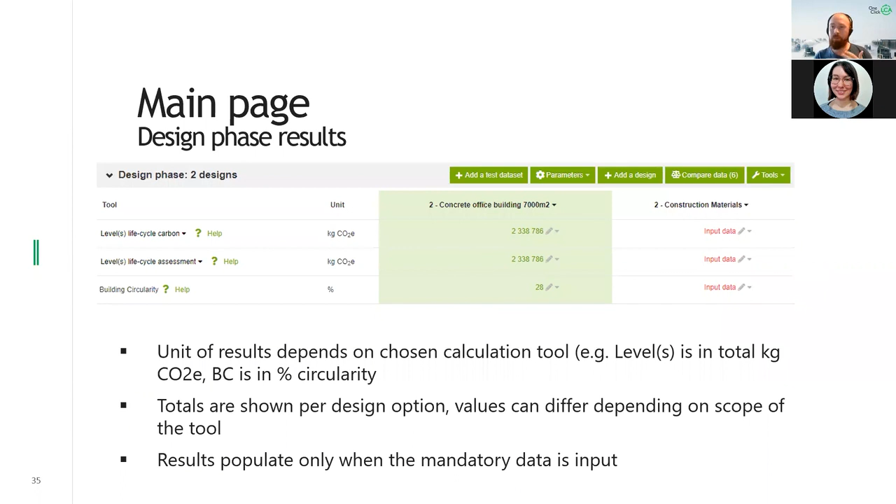The results figures you see here only populate when the mandatory data is met. So that basically means that for the design I have here, where it still says that input data is red, I'm missing some type of data. Could be that I haven't entered the building area or a calculation period, or maybe I haven't entered the energy or something. But if you don't get a number to show up here, it's always because there's something missing. You can usually just click on the input data and it will tell you exactly what it's missing. You populate that and we get results on the main page.

So it's quite straightforward. What we also have on the main page below the results is graphs. And these types of graphs we can use for all different types of comparisons from a graphical point of view. We could, for example, set it to the life cycle stages.

The result page can only be accessed by going to the result page. So if we're on our main page, before we're doing anything else, you open your project, you can click on the score. Even when it says input data, that something is still missing, you can always navigate to the result page. So even if you don't have all the results, it will still generate results, just not on the main page.

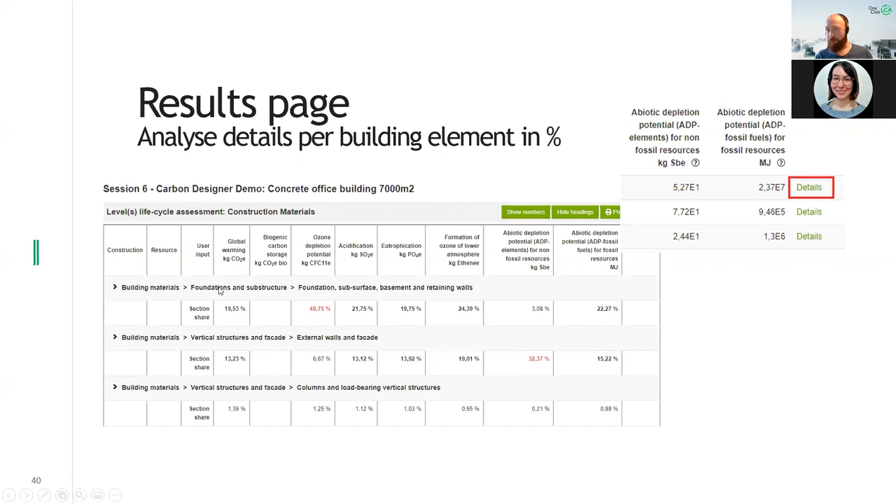Great to already kind of narrow down where the issues might lie emission-wise, but we can also narrow that down even further. So we can actually open, for example, the foundations and see exactly what is causing most emissions in those. We can do it based on percentage or absolute values, so emission values. In this example, I have set it actually to the emission values. So we can see in the foundation exactly what is there. And we can also see how the software calculates it if we would want to check that.

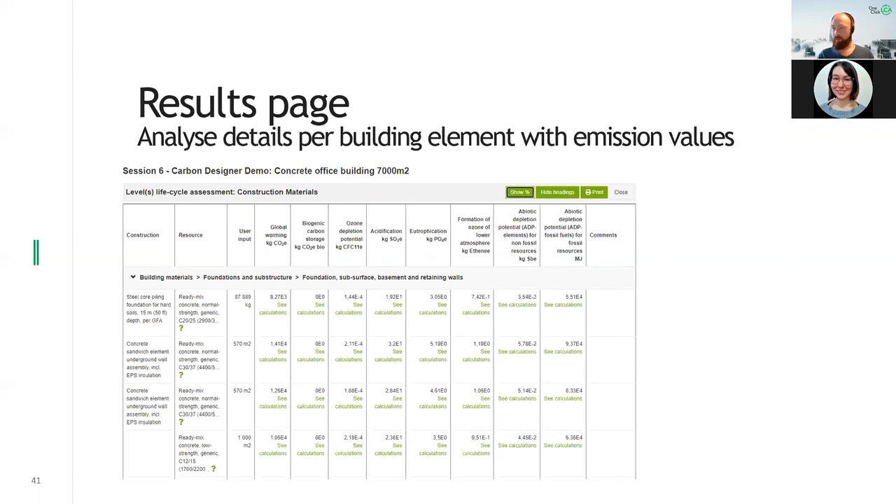Then I will shortly show some more stuff in the software for about 5 minutes, and then I'll answer the Q&A. I can already see there's quite a lot of questions which were answered by my moderator, so thank you very much for that.

So let's go into the design I have here, which is our building materials query.

So the filter setting, which I talked about earlier with those materials, you can always find there. There are, of course, a variety of other filters you could use, but if you're just looking for the right material, the material filter is by far the easiest and quickest to use because it narrows them into those different groups.

The one thing I want to highlight here is if you're doing installations and systems, be a bit careful about comparing data there because you can have similar equipment of very different sizes. With insulation, steel, or concrete, you can always narrow it down to one functional unit, like a cubic meter of concrete or square meter of insulation. But in installation systems, you often have resources recorded in units, so you might have a generator of 5,600 kilograms compared with a generator of 300 kilograms. So be a bit careful there.

But otherwise, this is quite a nice way to search for the data.

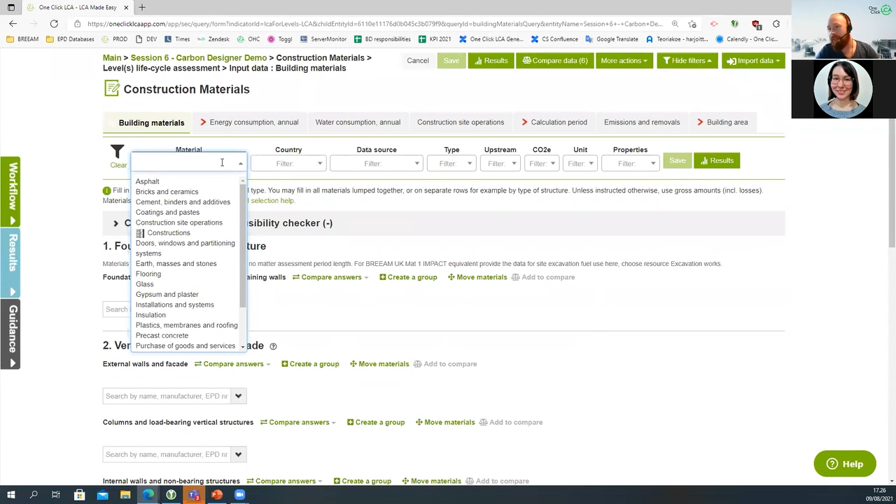Then the advanced materials comparison. If we open any setting, maybe I'll open my gypsum and set this to regular gypsum board. If I open it, it automatically tells me what type of data is meeting this specific material requirement. So I could say I want to compare this local gypsum board versus this generic gypsum board versus this gypsum board from Norway, and maybe put a Swedish gypsum board there too. I can then add this to compare, and it will tell me it has done so.

Then I can go to my compare data. It still also has some glass wool insulation from earlier, but I'll just get rid of that. Then I can automatically compare these with each other. So based on those data which I just had, I can see which one is lowest in emissions. It's definitely this generic one that I have here, but we have some different ones from different manufacturers which I could also compare with each other.

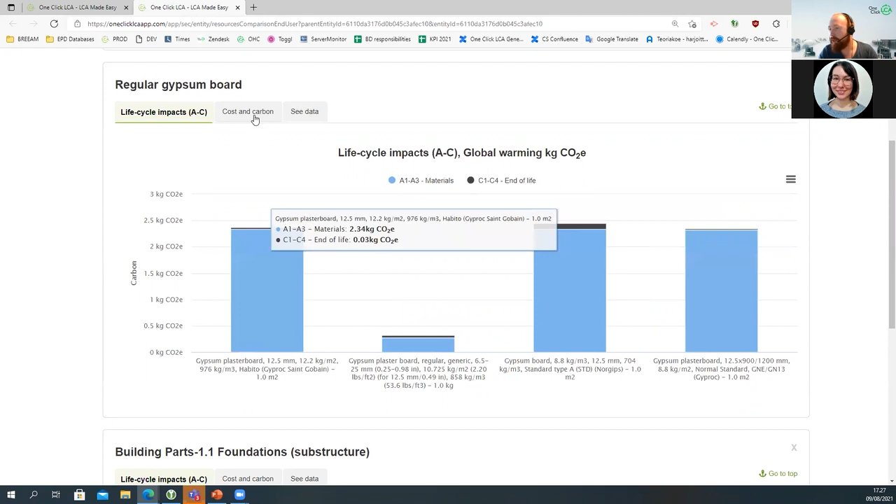I can also do it based on cost and carbon. It seems that for my generic one, I might be missing some data to compare this nicely with each other. So this comparison feature can be really good if you don't have time to do a full analysis or sensitivity analysis or whatnot. You just enter what materials you want to compare, and you can compare them quite quickly with each other. I'll just close this one.

Then the advanced material benchmarks. How do we access this? I've already gone over this a bit, but let's look at it again, taking a different resource—let's take some carpet flooring. If I open the carpet flooring, I will now only get resources belonging to this performance group. There were a bit over 500 there, 516. So I can right away see which ones are the best.

So we have, based on the carbon clouds, how they are performing. I could say maybe I'll take a Dutch one from the Inside database. I'll open the data card itself and narrow this down to the environmental profile. On this one, I can see we have the carpet, 516 resources in this performance group. I can then click on 'see full ranking' and see all the carpets in this group.

Now maybe I'm trying to find the best resource for Finland. Actually, that's not going to happen because there are apparently no carpets made in Finland, at least none with an EPD, so that's unfortunate. I will still try to find some better performing ones. In the neighboring countries, there's actually still not so much I could use, so I just have to try to go for worldwide.

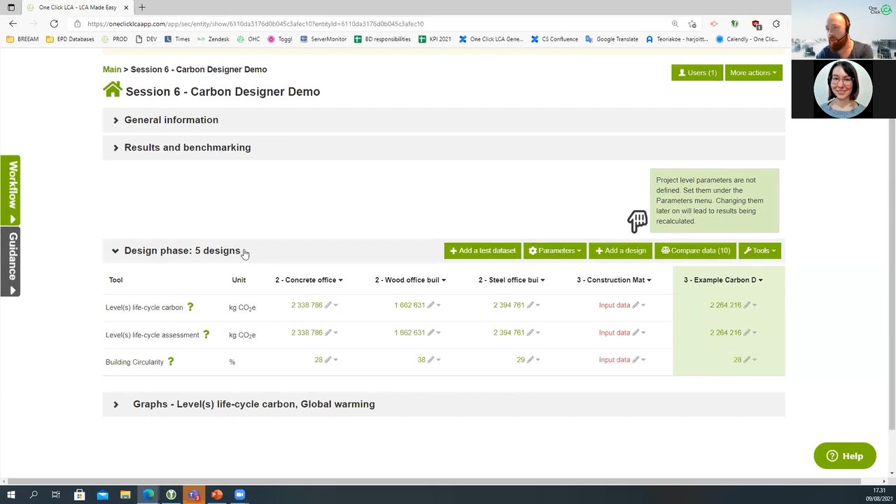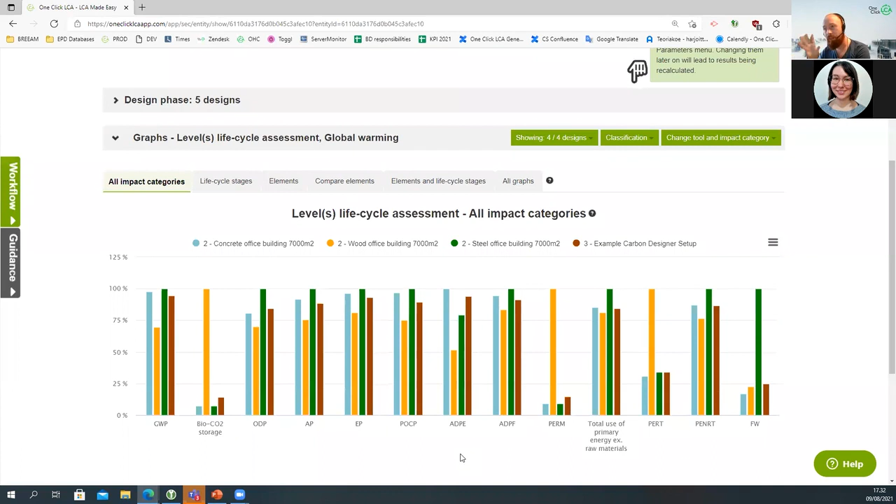We then have different types of graphs for comparison. So if I would want to exclude this one, and maybe set it to global warming potential for the levels tool, I could right away compare all the data I have just from this. This I could also use for different types of graphs. Maybe I exclude this one again.

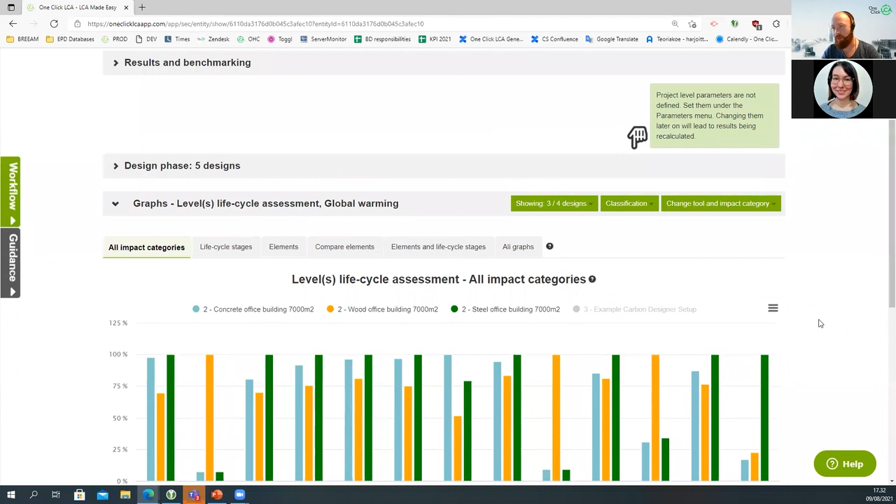Then I could, for example, download these or view them as a data table to get the total overview. Quite good if you're trying to do some quick optimization and you want to see right away what is better or what you can compare.

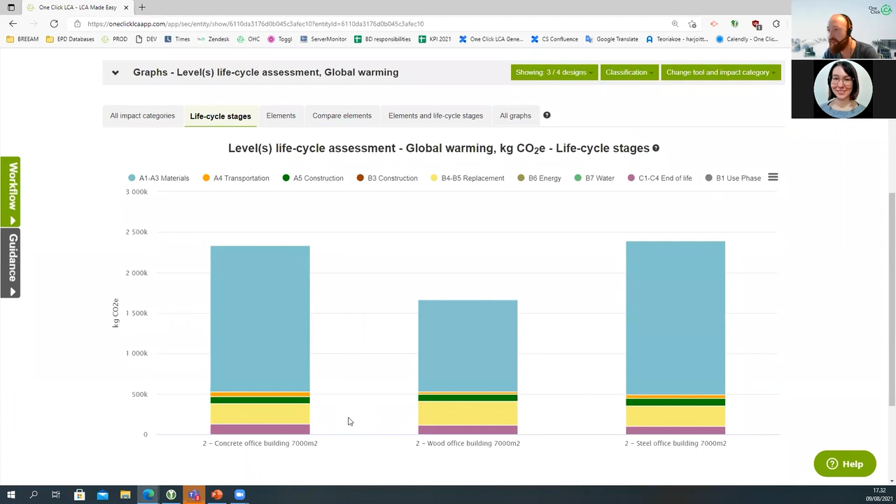Perushard asks if these optimizations can simultaneously also be compared with costing and other One Click LCA licenses. Yeah, of course. If you have a lifecycle costing tool, you can just select it here and it will display the costs. It just depends on what tools you have in your project at that moment. In this one, we just have some basic tools.

So then we have some more results stuff. I go to the result page, which you can always access, even if you don't have all the results yet. This design doesn't have any results, but if I only had some building materials or some energy, I could still view the results. So I would open this one maybe.

Tara asks if I can show the Sankey diagram. I'll show it, yeah. So this is the basic result page. We have the total tons of emissions, the emissions per square meter per year, and also the social cost of carbon. We again can see the benchmark set, and above here we can also do comparisons. We can download the reports right here if we want.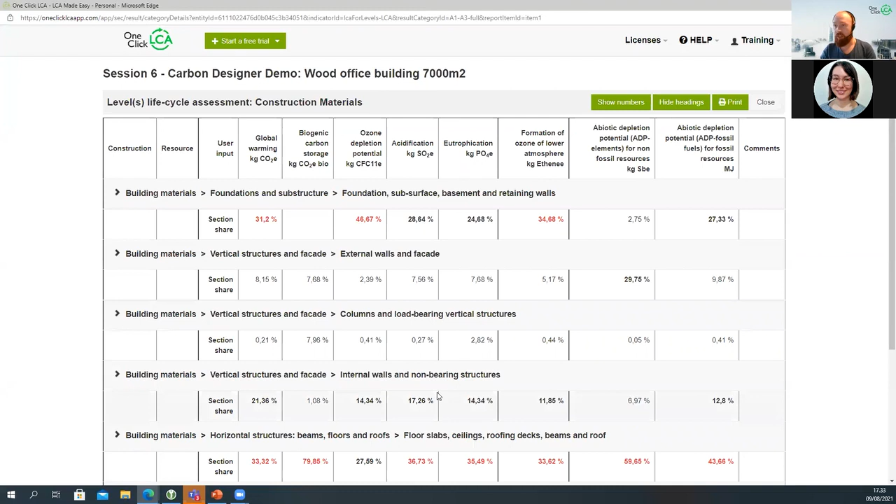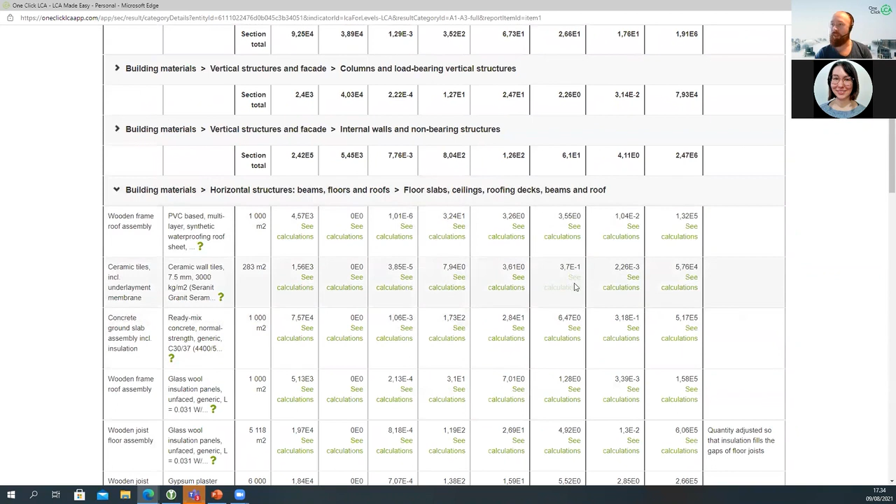Then we can go further into the results by clicking on the details tab. If I want to find out what is most causing my global warming potential, I'll open this one and get the total overview in percentages. Now I can see that my horizontal structure is causing 33% of my global warming potential. If I open it, I can see that of these, probably the highest is the ready-mix concrete I have here. But if I want to see how the software calculates it, I could set this to numbers and see right away how these calculations are made. We can see quite a lot by narrowing down to the building element or the individual materials to what we're really trying to look at here.

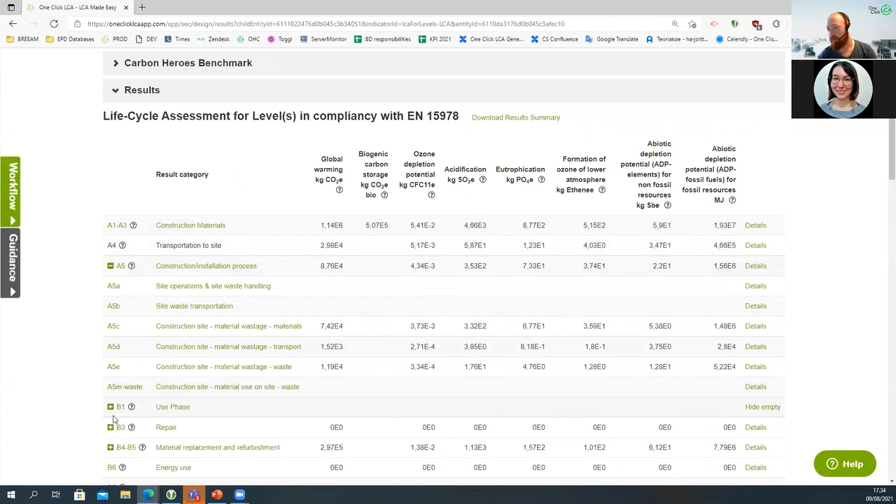I can also narrow these down and expand them if I want to look at different types of sections there as well.

Then we have, of course, a bunch of other indicators which are relevant for levels. Then we have there the completeness and plausibility checker. So the first one, the completeness checker, depends on the scope we have set. So for this specific design, I haven't really set a scope for levels. So what it's checking there, the 7%, is probably not really that accurate. But the plausibility checker is, of course, more accurate.

So here it checks the type of data I have to see if it's credible. I can see here that these two checks, number 3 and 4, are marked as wrong because I have a different setting in this design. So I have here a whole building with a concrete frame type. I happen to know that for this design, I have a wooden frame type. So it's checking now concrete against wooden, which of course won't work. If I would change the setting to actually allow for a wooden frame, it will probably validate these checks.

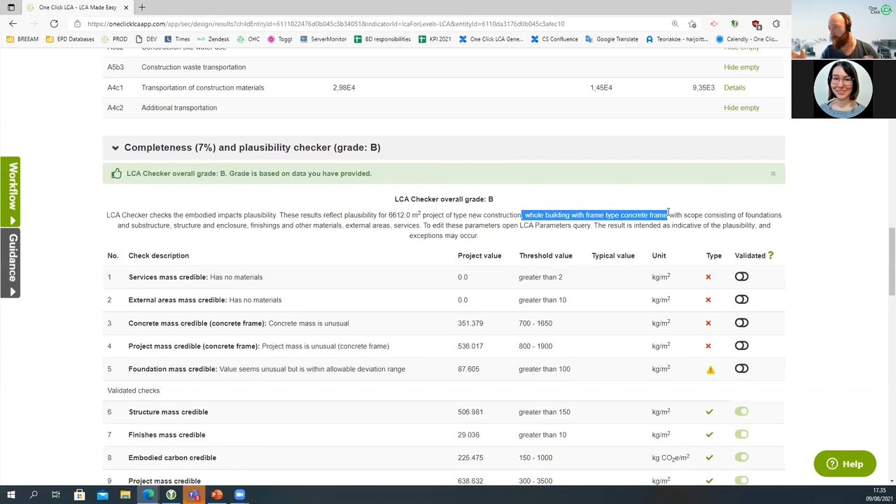But it has all these kinds of checks, which it looks at either in expected quantities of materials per square meter or expected emission values per square meter, percentage of materials, number of items, all these kinds of different checks. So quite useful if you're doing your first LCA, you just want to check, okay, what do I have here? Or even if you're not doing your first LCA. If you're just doing an LCA, you don't have all the data. You can easily see, okay, we might be missing this or that. I might want to focus on the windows. I might want to focus on the rebar, anything like this.

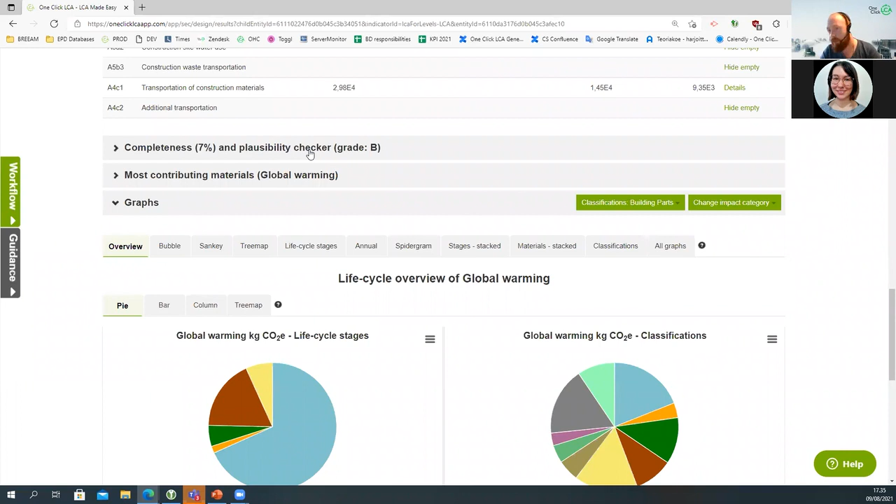The most contributing materials can, of course, be quite good to help you find better options. So we have here the structural steel. I could see that performance-wise, this one is number 156 out of 299. I can probably find a better option. Then what I could do is show sustainable alternatives. And it tells me that there are some welded steel tubes. Maybe that won't fit that well, but how about this one? Some steel beams from Norway. They maybe could work. So depending on what I'm trying to look for, I can quite easily find better options.

And the resources which it shows here are, of course, relevant for the country that I'm in at that moment. Like if I'm searching for Finland, it's not going to show me steel from Thailand or something like this. So if you have a different location, you'll probably get different materials showing up here.

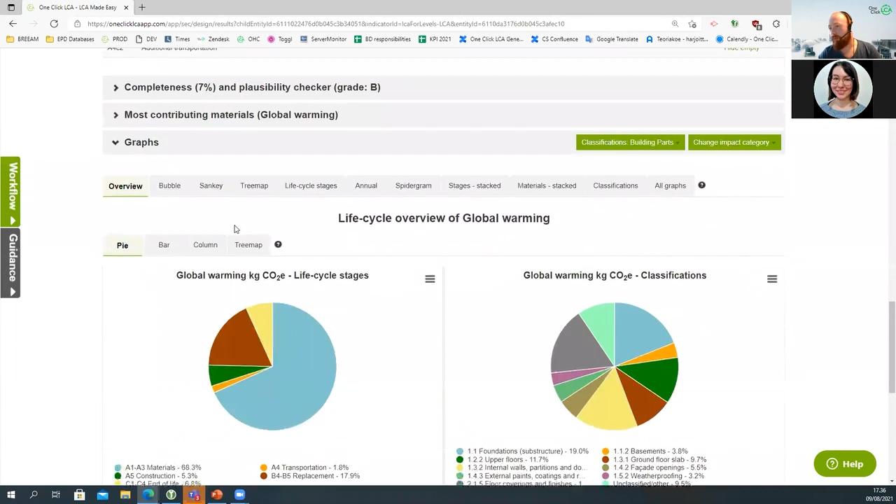Then we have the different types of graphs. So let's go over them as some people were interested in this. So we have the pie charts, the bar charts, the columns, and the tree maps. So all of them show the different life cycle stages, the resource types, the classifications for the mass and the classifications for global warming potential. Then we have the bubble charts, and it shows the biggest groups of material emissions in our project. Not even material emissions, it can show anything really. And you can also exclude parts if you don't want to compare them.

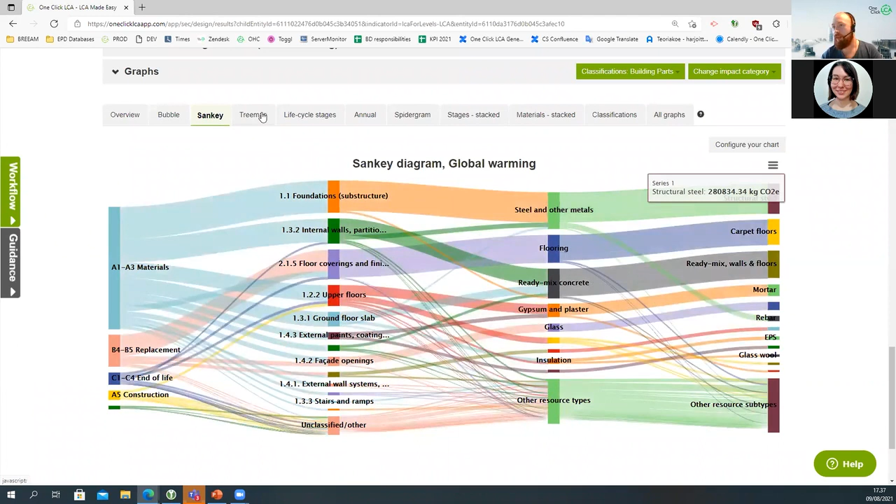We have the Sankey diagram, which shows the flow of emissions throughout my project. And you can also configure this a bit differently to, for example, include the resource subtypes. So we really can get some nice graphs which show all the flows of materials through the different building elements, to the different material types and where they go. We then have some more tree maps which specifically talk about the resource subtype and the life cycle subtype.

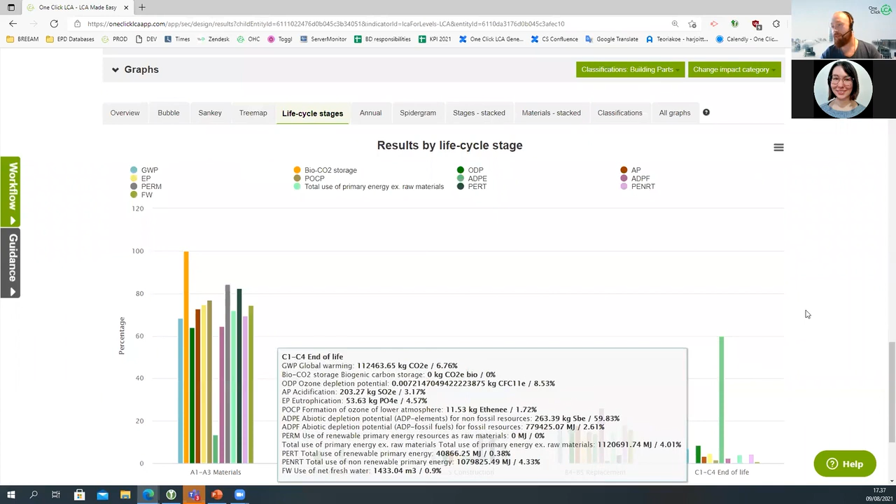Then we have life cycle stages, obviously. One graph that always has to be there, which shows the different types of emissions for the different life cycle stages. We then have annual emissions. Annual emissions, if you don't include energy or water, might look like this. But of course, if you have energy and water, there could be much more here also. Usually you see that the A1 to A3 is the largest there. We then have the spidergram, which shows it based on classification system in this case.

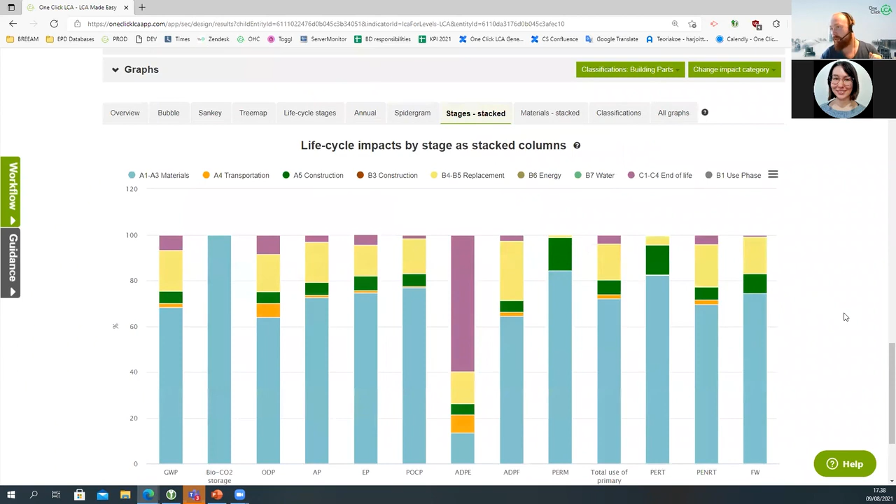So we have now the building parts breakdown, which is levels, so it shows that one. We have the stacked life cycle stages as columns. So we can see for the different types of indicators where the majority of our emissions is coming from. We then have the materials stacked. So for the different emissions, we can see in global warming potential, a very large part is coming from the structural steel, but also the woven wall-to-wall carpet is actually causing a lot of emissions. So depending on what we have, it can be quite nice to understand the different types of materials you have there.

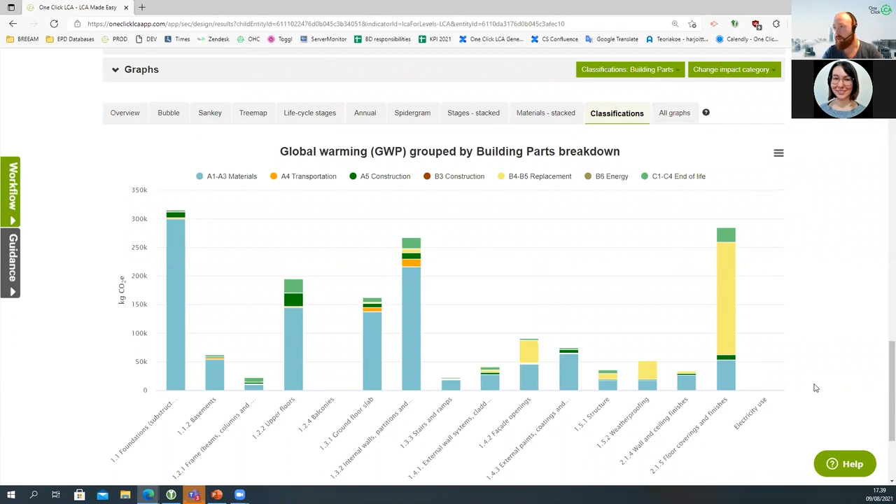If you have assigned the correct classifications, you can also do it based on classifications. In the levels tool, of course, we take the building parts classification because this is what we are using for levels. But in BREEAM, this could be using the NRM 1. In LEED, it could use OmniClass. It kind of depends on what we're trying to do. These graphs, you can also have all of them listed beneath each other if you really want to go all out and include all of them in your assessments.

So yeah, those were the kinds of things that I wanted to discuss during this session. So now I can focus a bit more on answering some questions. I'll just put the Q&A part back on if I can get to my PowerPoint.

So I'll go all the way here.

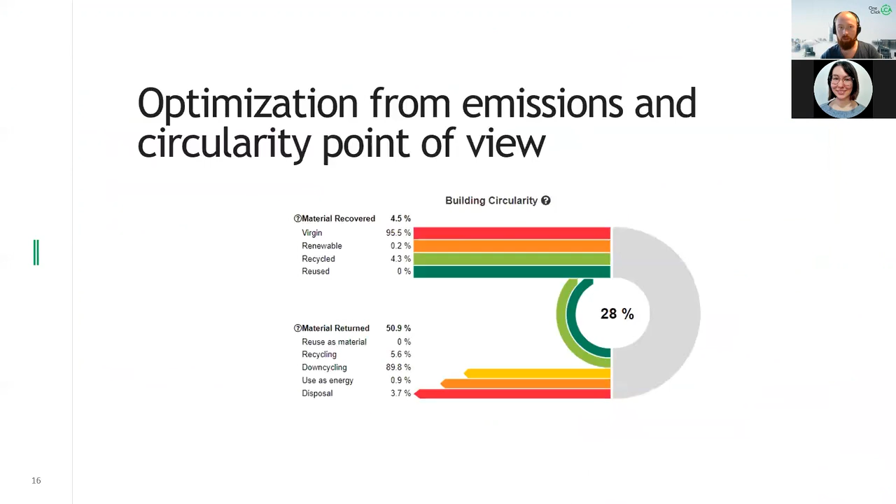Questions. Alrighty. I see that 60 questions have already been answered, so thank you very much to my moderators. That is great. Let's see if we can answer a couple more still. I'll just start from the top.

Suganya is asking, I'm trying to include a foundation type, random rubble stone masonry with building cement mortar. The natural granite stones of random sizes used in construction are locally sourced. So the best way to include that would be to create a group yourself. You have this feature called grouping materials as constructions, which is available to you. So you would probably have to calculate what materials or constituents of your foundation type go into 1 square meter, include that, and then just fill it in for your group.

Maybe I could actually just highlight the relevant article we have on the support center for that, which would be grouping materials as constructions. This one. So I would check this article for that. You can pretty much do what you're asking for with that.

Brian is asking, where can I get the approximation number for seismic input sections for building parameters? So in this case, not sure if we can share the calculations behind it, but they have been done based on seismic activity and they affect the structural parts of Carbon Designer. If you have more specific questions about the seismic input, I would recommend to just mail us on support@OneClickLCA and I can answer your question probably better there, because seismic input can be quite a long discussion, which I don't have too much time to answer today, unfortunately.

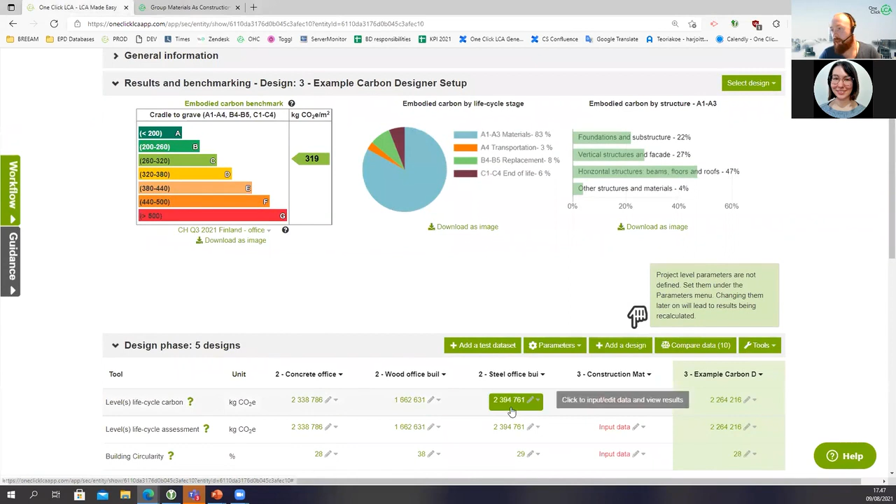Suganya asks, can we input the kind of appliances we will be using for heating, cooling, and lighting, and so on? You can indeed. Those are all available under the installations and systems query, but the quantity of data available there isn't as big as with traditional building materials, because there is not really a push for manufacturers to release that type of data for heating and cooling and whatnot. So in installations and systems, you would go to, for example, the HVAC components, as I'm now showing here, and you will have quite a lot of different data you could be using, but they might not meet your exact requirements. So you might have to apply some scaling or choose the closest matches.

We actually also have an article on that on the Help Center. I'll just pick it up now. So if you want to include building technology or MEP, I would recommend to check this article. It's quite good and straightforward on how to do it.

Another question from Suganya. Are there impacts on the choice of design, climate responsive design, passive regeneration, etc.? Can it be accounted as well? You cannot maybe include the construction methods, but you can definitely include the materials needed for it. Like a passive house might be higher in emissions, A1 to A3, but it might be lower in operational emissions because you're not having any energy use. So you can definitely include it.

If you're building with some exotic materials which are not that common, you might not find the exact resources in the database, but you can usually make them up from existing raw materials or materials which already are in the database. Then you can use that grouping of materials as a construction option.